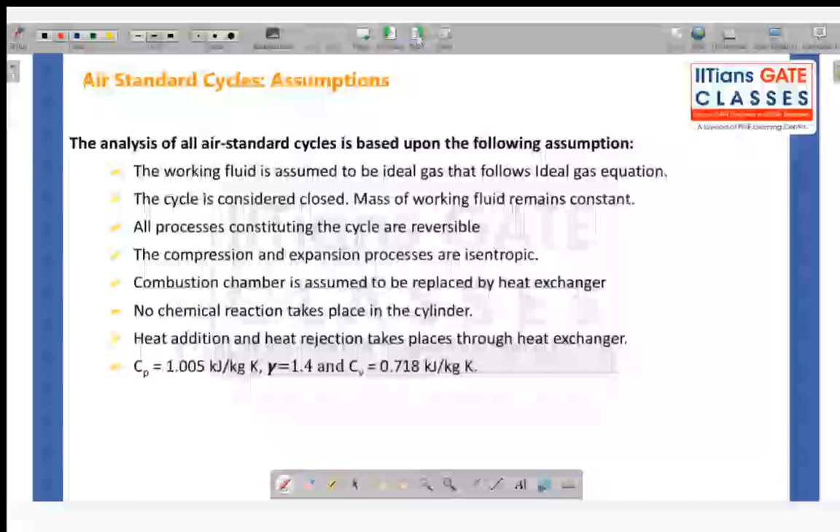So we will be covering Otto cycle, diesel cycle, and Joule cycle, which is also called gas cycles. And finally, we will cover compressible flows. Just a brief idea, because when you specially go to that particular topic, you will study each and everything in detail. So we will cover the very basic idea of compressible flows. Okay, so I hope we are ready to start without any delay.

So you see, basically, whatever cycle we use in power plants, or even in automobiles, in your petrol engine, diesel engines, these cycles are basically real cycles. Now in order to do a thermodynamic analysis on those cycles, you have to make some assumptions. Now when you apply those assumptions to the real cycle and derive a thermodynamic cycle, that is called an air standard cycle. Again, I will tell you something.

For example, you have this reciprocating engine, and there will be fluid going in and coming out, but this is your real engine. Here, maybe, for example, you will assume that you are adding heat at constant volume. You assume that the piston is constant and you are adding heat in a very small amount of time, but in reality this piston will be moving in the real cycle. But for thermodynamic analysis, you will assume that for that particular instant in which heat is added, this piston is stopped and the volume is fixed.

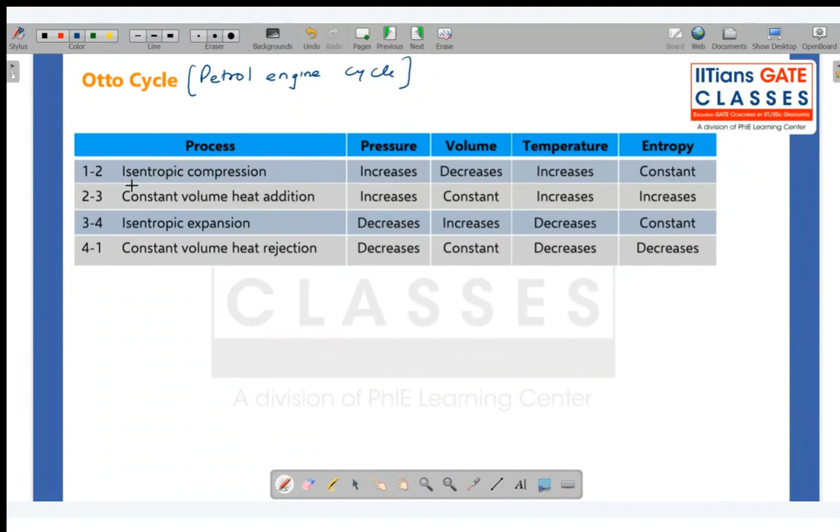Now we will directly move to Otto cycle. Otto cycle is basically your petrol engine cycle. Now in your petrol engine cycle, there are two types of processes. What are the two types? Two isentropic processes and two constant volume processes.

And if it is compression, then what will happen? Pressure is going to increase, volume is going to decrease. And if you are doing compression, pressure and temperature both are going to increase.

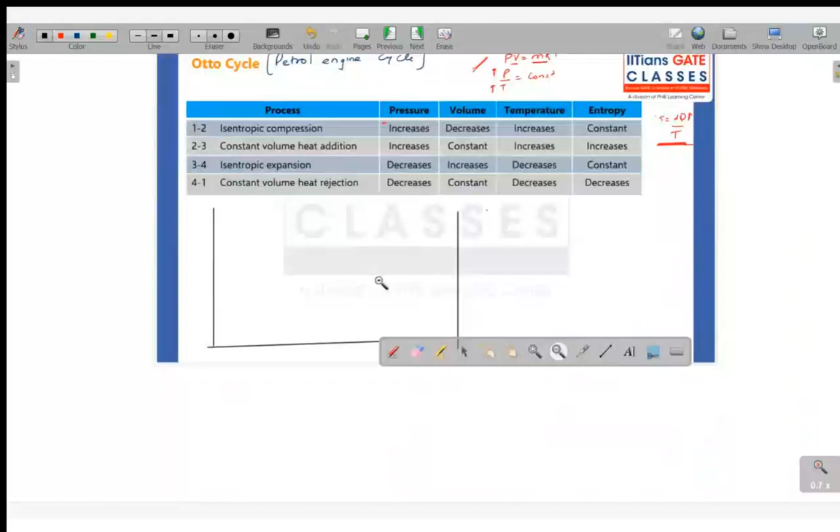So let us try to understand the PV and TS diagram. How to draw PV and TS diagram for the Otto cycle.

So let us say this is my pressure-volume diagram, and this is my temperature-entropy diagram. First, 1 to 2 is isentropic compression. I hope you're all aware of how to draw isentropic and all other processes on PV and TS diagrams, because we have already discussed and drawn all these diagrams.

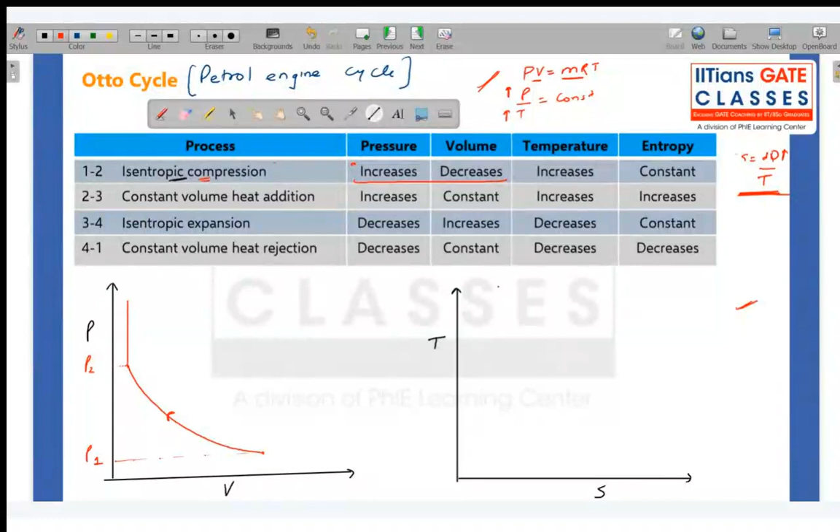Second, we are only talking about pressure and volume here; temperature and entropy we will see in the other diagram. Then constant volume heat addition. How do I draw constant volume heat addition on a PV diagram? By a vertical line up. Yes, vertical up. Very nice. So this is my vertical up, this is point 3, constant volume heat addition.

Then isentropic expansion. It will go in the opposite direction to that of compression, like this. And then eventually I will end my cycle with constant volume heat rejection, and you all know that it is vertically downward.

So this is 1 to 2, this is 2 to 3, 3 to 4, and 4 to 1. 1 to 2 is isentropic compression, so I have to give compression work. Then constant volume heat addition, so I am adding heat Q in. Then turbine work, work output going out, 3 to 4. And finally 4 to 1 is constant volume heat rejection, Q out. So this is my PV diagram.

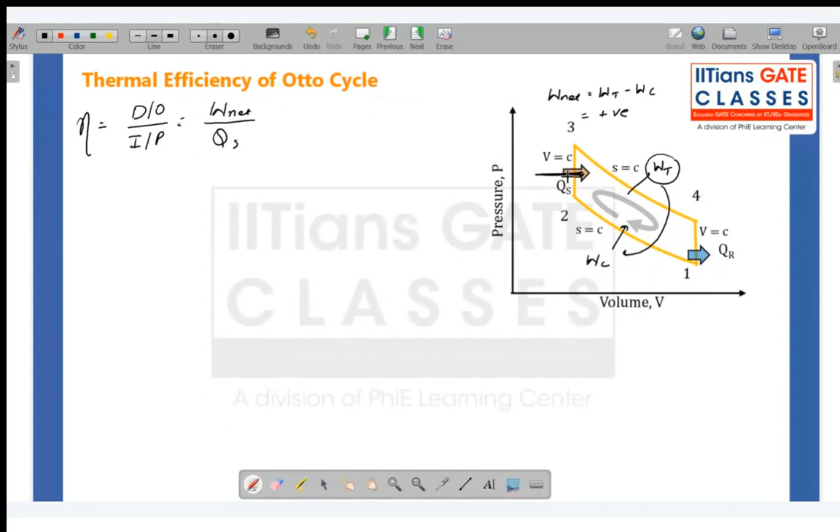Okay, what is net work? If this is your work of compression, this is your work of turbine, so net work is equals to work of turbine minus work of compression, and this should be positive. This should be positive because whatever you are getting from turbine, some part of it is given to the compressor, basically simple. Okay, so you want net work output, net work should be positive. And heat input, q supplied, this q supplied is heat input.

Okay, now we already know that from first law of thermodynamics, for a cycle, what is first law of thermodynamics for a cycle? Yes, so basically q net is equals to w net. Okay, so this area also gives you q net, also gives you w net. Yes, that is not for a cycle, that is basically in general first law of thermodynamics, that is a general form. Then we derive it for a cycle, then we derive it for the process.

Okay, so I can say it is q net upon qs. So I can also write q net as q supplied minus q rejected upon q supplied. So finally, I can write my efficiency as 1 minus q rejected upon q supplied.

Now, I have given you one table, a very good table, and I have shown you how to calculate heat rejection or heat transfer in constant volume process. So can you tell me quickly, constant volume process, how can I find out heat transfer? What is QR and what is QS? Constant volume heat transfer in constant volume process, how do you find out? Okay, if you don't remember, let me know if you now remember.

MCV, this is rejection, okay so this is rejection, 4 to 1, so I can write T4 minus T1. Okay, and supplied is MCV, T3 minus T2. Do you remember these formulas? We use CV here for constant volume, we use CP for constant pressure, CP for constant pressure, okay.

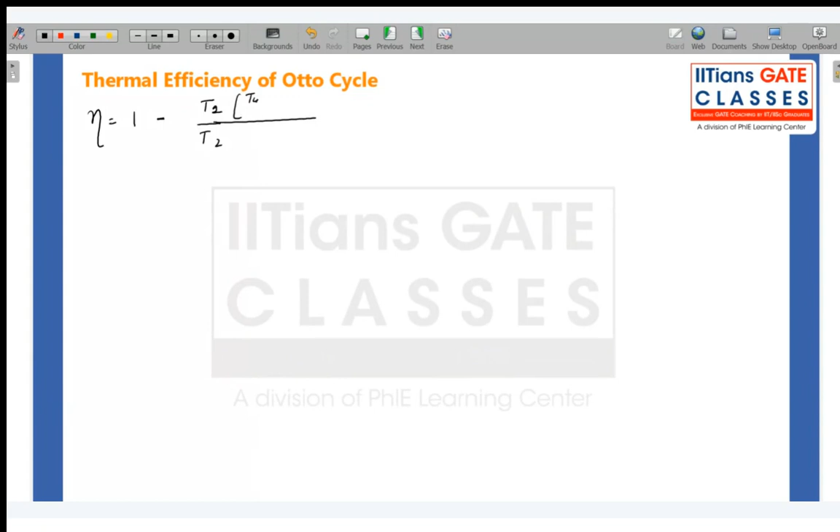So I can, because it is air, I know it is air, and the same fluid is flowing there, fluid is not going out, same fluid is flowing, so mass is constant, CV is also same. I can write 1 minus T4 minus T1 upon T3 minus T2. Now I can take out T1 and I can say T4 by T1 minus 1, and I can also take out T2 and I can say T3 by T2 minus 1. Okay, so right now this is my efficiency.

So what do I get? Efficiency is equals to 1 minus, I have taken out T1 and here I have T2, and what do I have in the numerator? T4 by T1 minus 1, and this is T3 by T2 minus 1. Okay, this much is okay? Yes, T3 by T2 minus 1. Yes.

Okay, now we will simplify it in the form that is mostly used. Okay, so you see here, let me take this diagram.

Okay, let's go to the next page. Now, what is the efficiency that I got? Efficiency equals 1 minus T1 by T2, and here we have T4 by T1 minus 1, and here we have T3 by T2 minus 1.

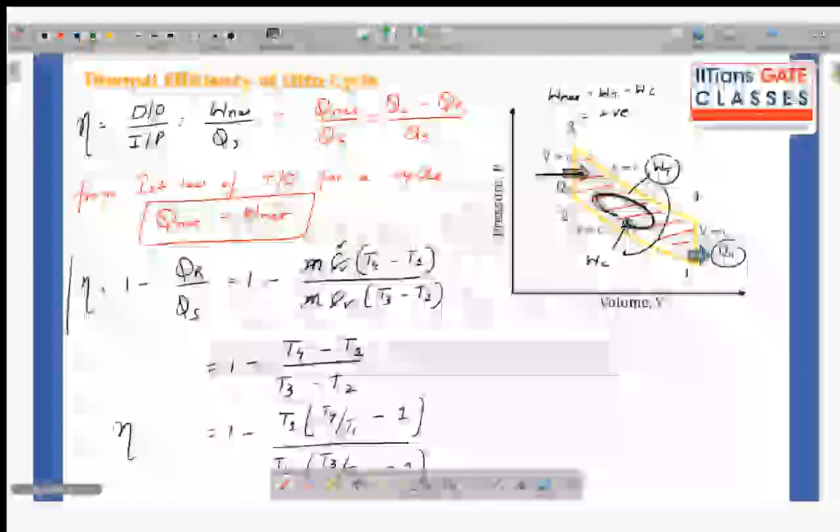Now can you also go back to this diagram? Can we say that V2 equals V3 and V4 equals V1? Yes, V2 equals V3 and V4 equals V1, right? You see, same volume.

So can I write V1 by V2 to the power gamma minus 1? Yes. So basically T2 by T1 equals V1 by V2 to the power gamma minus 1, and similarly T3 by T4 is also V1 by V2 to the power gamma minus 1.

So from these two equations, can I write T2 by T1 equals T3 by T4? Yes. Now let me modify it a little, and can I write T4 by T1 equals T3 by T2? I can write this, I've just taken it to the other side.

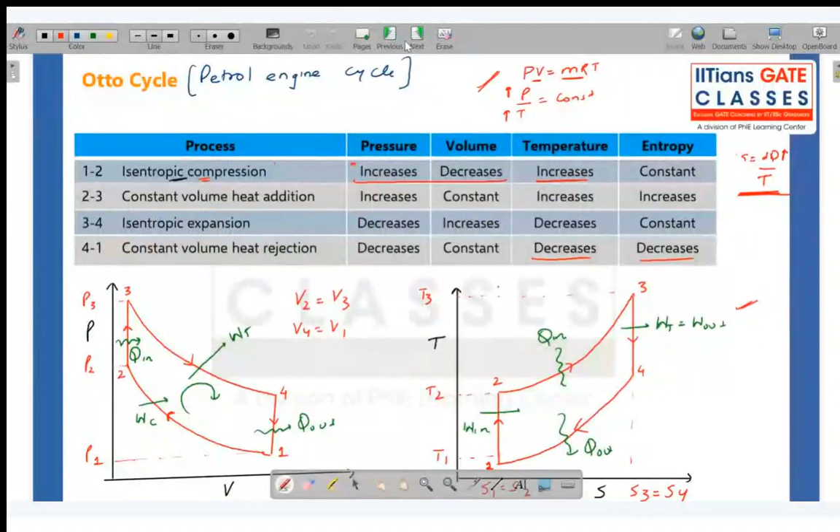Now let me subtract minus 1 here and minus 1 here. They're also equal, so I was trying to cancel this. I have gotten T1 by T2. So efficiency equals 1 minus T1 by T2.

Okay, now there are a few terms that you need to know.

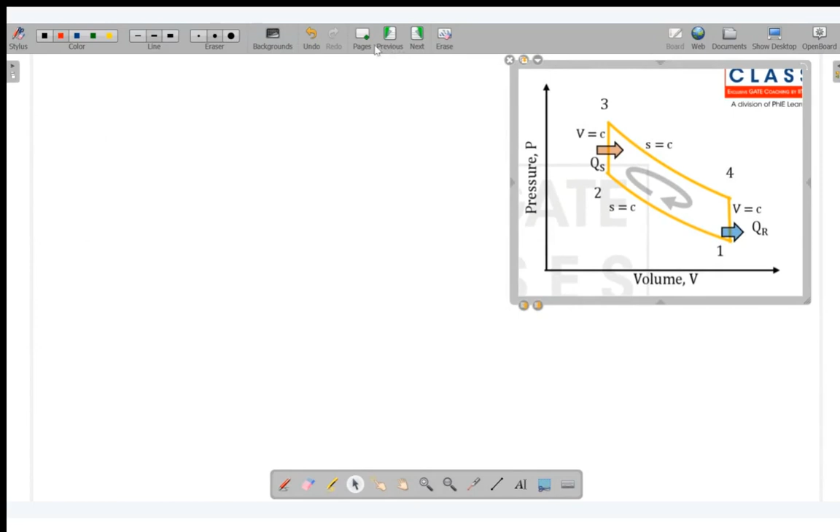Just one second. I did not want it to do this. Okay, anyway, now...

So basically, this is what you got. What does efficiency equal? Efficiency equals 1 minus T1 by T2.

I mean, the pages are a little bit shuffled, so this is how we started in the beginning, and there is this middle page here, and then this next one. So just be a little cautious when you study. Now, the efficiency we have gotten is 1 minus T1 by T2. Got it?

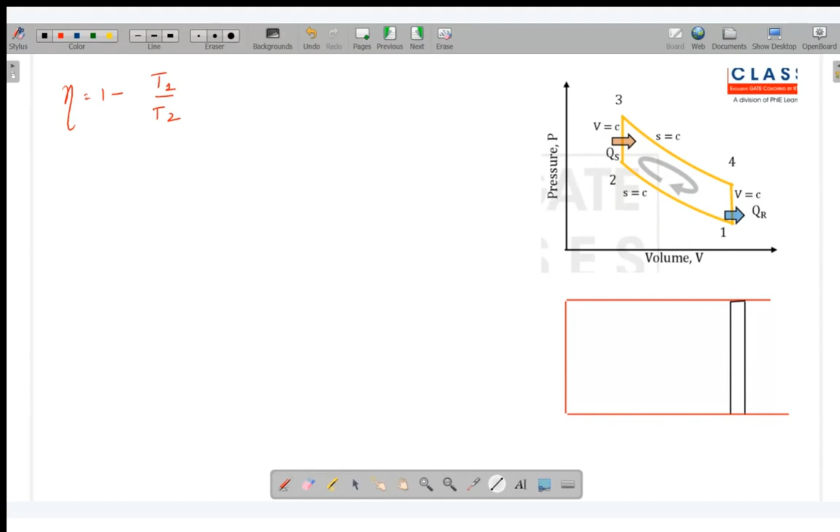Now this T1 by T2 is basically, you see, how your engine works, how your petrol or diesel engine is there. So it's something like this.

Okay, somehow it looks like this. Now, the piston only—this is the whole volume available, this is your V1, because piston is here and all the volume available is V1.

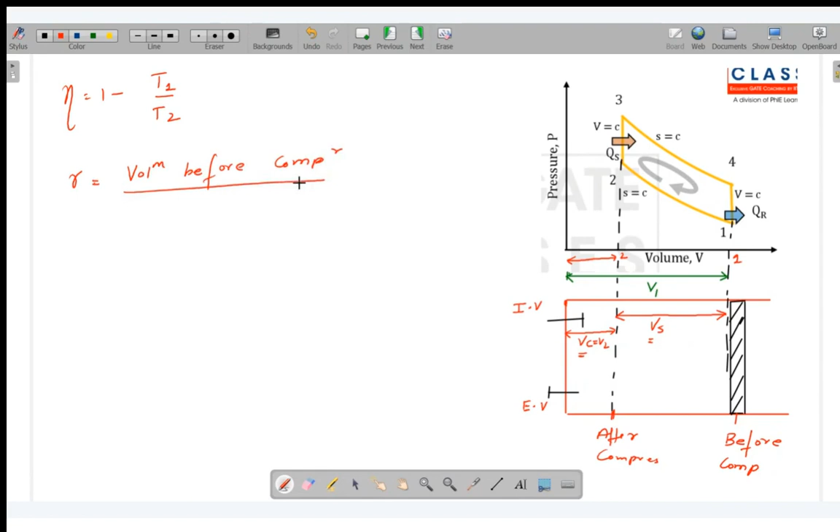Now this ratio is before the compression. This is before compression—piston is here before compression. Then when the compression ends, the piston is here after compression.

So the volume before compression and the volume after compression is called compression ratio. So this is V1 by V2. And that is also equal to T2 by T1 equals V1 by V2 to the power gamma minus 1, or compression ratio to the gamma minus 1.

So how can I write my efficiency formula? I can write efficiency equals 1 minus 1 by R to the gamma minus 1. This is how I can write my efficiency formula in terms of compression ratio. Why is compression ratio important? Because in questions they will give you compression ratio most of the time, otherwise you will need to find it out. So compression ratio is very important when we talk about Otto cycle or diesel cycle.

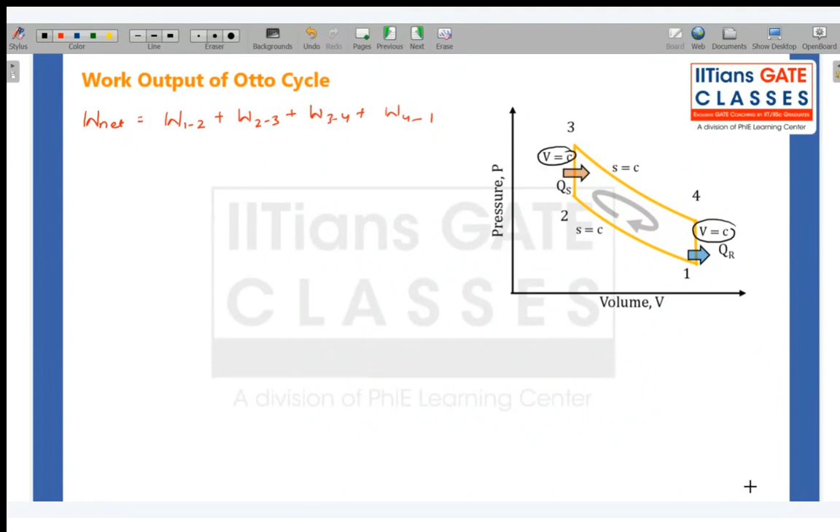This slide. Yeah, this is the start of the derivation, no? Okay, just one second, this is the start of the derivation. So let me write the numbers. This is your first slide, this is your second slide, then this is your third slide. Okay, and finally we have reached here.

Got it? So I will not waste much time because we all know constant volume work is how much? Constant volume work is how much? Yes, zero, so this is zero and this is zero. And this is isentropic, these two are isentropic processes.

So I hope you already know how to calculate isentropic work transfer. Work 1 to 2... let me write 3 to 4 first because it is work output, and since it is negative work, it is work output so it will be negative, I'll write it later. So P3V3 minus P4V4 by gamma minus 1. This is this. Now minus P2V2 minus P1V1 upon gamma minus 1.

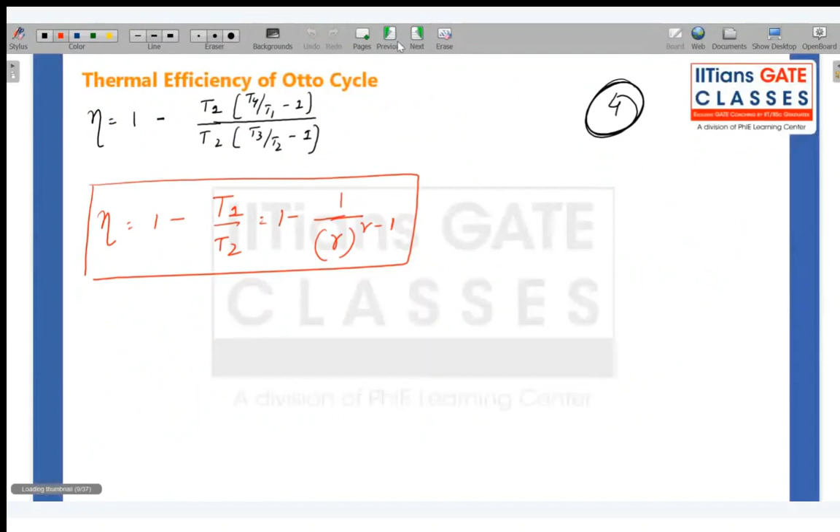What about process 3 to 4? P3 by P4 equals V4 by V3 to the gamma, which is also R to the gamma. So from A and B, I can say P3 by P2 equals P4 by P1, and this is also called pressure ratio, RP.

First derivation, which one? Did you take the screenshot? This is not it, this is the first slide, right?

Okay, so I can say this, and I can also say look, V1 by V2 equals R, so V1 equals R times V2. Also V4 by V3 equals R, so V4 equals R times V3. It's okay, Shivendra.

Now why am I doing this? I am just trying to simplify my equation, and this equation you will use very rarely. I am doing basic, simple mathematics. So even if you don't understand, it's fine because 99% of the time you will not need to use it, but because we need it later on, that's why I have to do it.

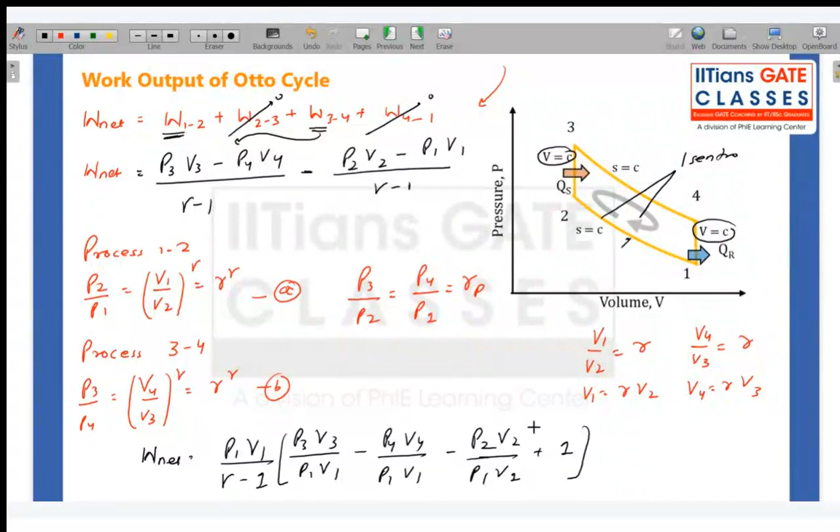Next, so I can take net work equals, let me take P1V1 upon gamma minus 1 out. I will divide everything by P1V1, okay, minus P4V4 upon P1V1, minus P2V2 upon P1V1, plus 1. Now you see, look, this is P1, okay, P3 by P1.

P2 by P1 is given, P4 by P1, P3 by P1. Okay, so now what do you have? You see, you have V1, you have V3. Okay, you have P4 by P1.

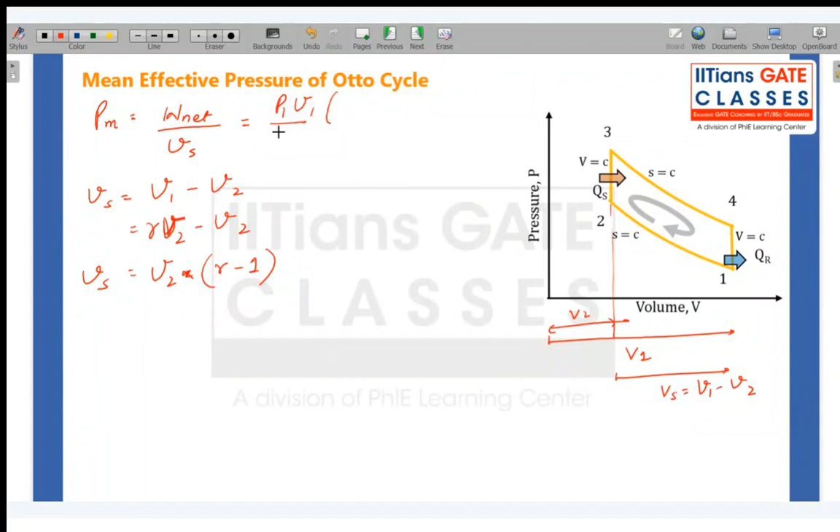Now from this equation, you see what is V2? V2 is equals to... V1 is equals to RV2. Okay, so I can write V1 minus R. Sorry, V1 is equals to RV2, right? V1 is equals to RV2. Okay, so I can write RV2 minus V2. Yes.

So V2 is equals to, sorry, into R minus 1. This is your swept volume. Okay, now I already got my equation earlier.

What was that? P1V1 upon gamma minus 1, RP minus 1, R gamma minus 1 by gamma. And what is swept volume? V2, R minus 1, R minus 1.

So if you write here, you see what is there? P1 is there, okay, and RP minus 1 is there, R gamma minus 1 is there. Let me take this gamma minus 1 here and R minus 1. Okay, now what is left? This V1 and this V2 is left. So V1 by V2, and that is equals to R. R is what? V1 by V2.

So this is your mean effective pressure. This is your mean effective pressure.

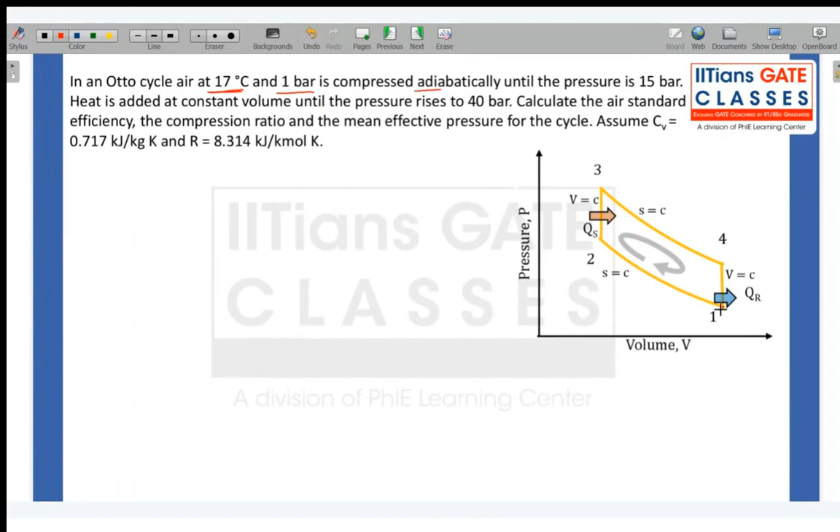Okay, so let us solve a quick question on Otto cycle. I should not start diesel cycle so soon, so we'll do one question. Maybe you will understand what type of questions. And again, look, it will be a big question. It is from a book, not from GATE or any exam, but it will cover more than one concept. So basically, whatever we have done, it will be clear to you. Okay, so just be patient with me.

Okay, chalo. In an Otto cycle, air at 17 degrees Celsius and 1 bar is compressed adiabatically. So in the compressor, it is entering. So what is compression starting? 1 point is starting. So T1 equals 17 degrees Celsius, or I can say 290 Kelvin. At what pressure? 1 bar, which means 10 to the power 2 kilopascal.

And it is compressed till the pressure becomes 15. So compressor outlet is P2, this is compressor inlet P1. Compressor outlet, that is P2, is 15 into 10 to the power 2 kilopascal. Heat is added at constant volume until the pressure rises, that means final pressure after heat addition, which is P3, is 40 into 10 to the power 2 kilopascal.

What do I need to find out? I need to find out Otto cycle efficiency, compression ratio, which is V1 by V2, and mean effective pressure, which is net work by swept volume. Okay, chalo.

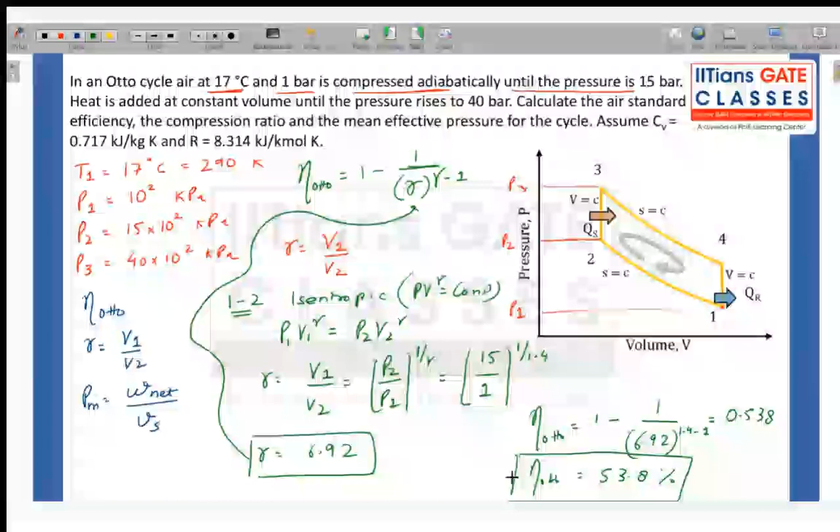Okay, now I know P2 is 15 into 10 to power 2, and this is 1 into 10 to power 2. 10 to power 2 will get cancelled, and this is 1.4. So R, when you calculate, you will get 6.92. Now I can substitute my R here, and I can find out efficiency 1 minus, 1.4 minus 1. Here this is around 0.538, so basically 53.8% efficiency you have gotten.

Okay, this much is fine. Yes, it's very simple, till now it's very simple. Okay, now next we have to find out mean effective pressure. We have to find out mean effective pressure.

So what is mean effective pressure for Otto cycle? Mean effective pressure equals net work by swept volume. So what is swept volume? Swept volume is V1 minus V2. How can I find out V1, V2?

You see, you know this at one point. First of all, I know it is air, so I can apply the ideal gas equation. So can I say P1 v equals RT? This is small v, okay. Small v equals capital V by mass. RT, so V1 I can say RT1 by P1. Can I say this? Yes or no?

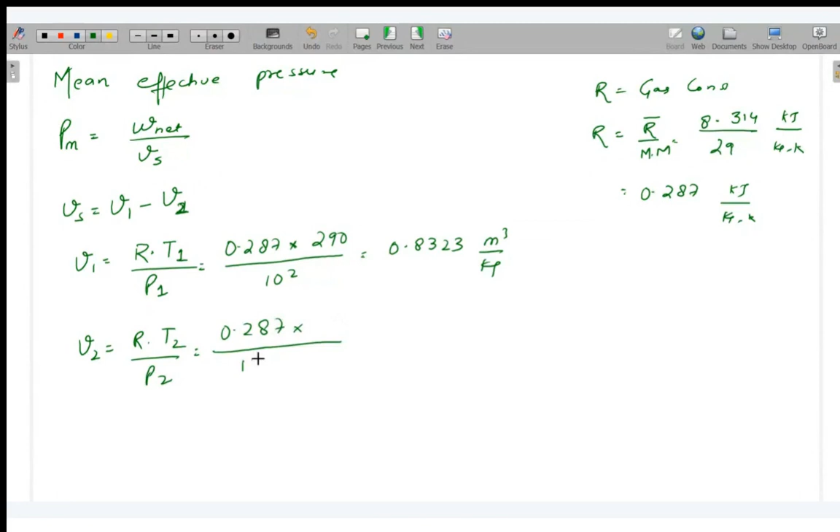Can I take this R? No, I cannot take this R. This is universal gas constant. I need to find out my specific gas constant, which is universal R divided by molecular weight. So 8.314 by 29 kilojoule per kg Kelvin, which I think gives 0.287 kilojoule per kg Kelvin. Okay, so R is 0.287. Temperature is given at the beginning and pressure is 10 to the power 2.

So this you will get, 0.8323 meter cube per kg. Similarly, I can find out specific volume at point 2 as well.

RT2 upon P2. Now the problem here is I do not know T2. Can you tell me how can I find out T2? Yes, by basically the ideal gas equation for isentropic process. You see, 1 to 2 is isentropic process, so I can write for this process, T2 by T1 equals P2 by P1 to the power gamma minus 1 by gamma. Yes, from volume also I can find out, but I do not know V2, right? First of all, I need to find out V2.

Or maybe compression ratio also I can find out. Yes, I know R. Okay, so from there I can find out. Yes, that is correct. Now I don't know individual volumes, but I know pressure ratio and compression ratio.

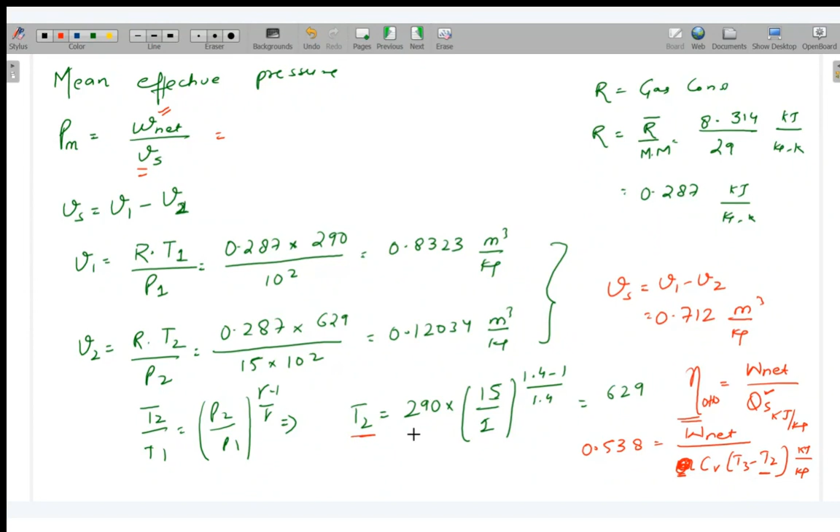So heat supplied, what is the heat supplied in this? Heat supplied at constant volume, I have already defined this for you earlier. It is mCV dt, and dt is what? T3 minus T2. Now this m, I can take as 1 because I can take the numerator as kilojoule per kg and denominator also kilojoule per kg.

So I can remove this, only CV. Now CV is given as this. I know T2 also, I have calculated T2 here. T3 I don't know. Now how do I calculate T3?

I can use my ideal gas equation. Anyone? What equation can I use to calculate T3? By process 2 to 3 which is constant volume. So I can say P3 by P2 is equals to T3 by T2. So basically T3 is equals to T2 into P3 by P2.

You see, I know T2, I know P3, P2. Very simple, when you put all the formulas and values, you will get T3. I know it got a little congested, but I just want to do it here. So this is your T3. Now I can write here.

Let me add another page. So my efficiency is equals to net work, small w, by CV into T3 minus T2. Efficiency is 0.538. Net work I need to calculate. CV is given as 0.717, and T3 I have just calculated, and this is 629.

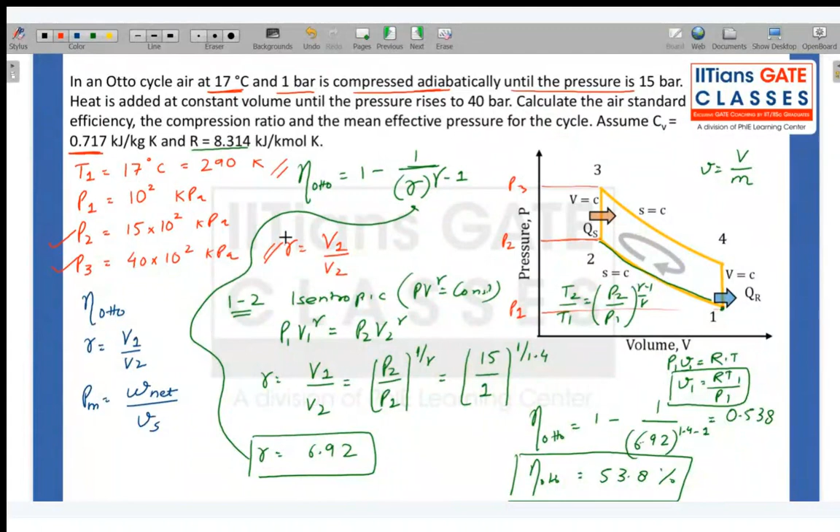So this is one question on Otto cycle. I tried to cover everything in one question. In GATE you will not get these big questions, it is from a book. In books you will find more than one concept covered. This is covering three concepts, actually more than three concepts. You have applied ideal gas equations.

You have applied this ideal gas equation, and for processes also you have applied isentropic process, constant volume process. You have used the efficiency formula, compression ratio you have defined. So more than 3-4 concepts we have covered. Got it? Yeah, it's basic physics, I think it's not even engineering level.

It's basically your universal gas constant value is 8.314 kilojoule per kilomole Kelvin. And when you use this in ideal gas, PV is equals to NRT. So this is number of moles, and this is universal gas constant.

Even I covered this when I talked briefly about ideal gas equations. Now this equation is not used by mechanical or aeronautical engineers, it is used for chemical engineers, because here we're talking about number of moles. Now in order to convert that into mass, the other equation we use is PV is equals to MRT. Here R is equals to R bar by molecular mass, and N is equals to M by molecular weight, same molecular mass or molecular weight. So basically we just turn it into that.

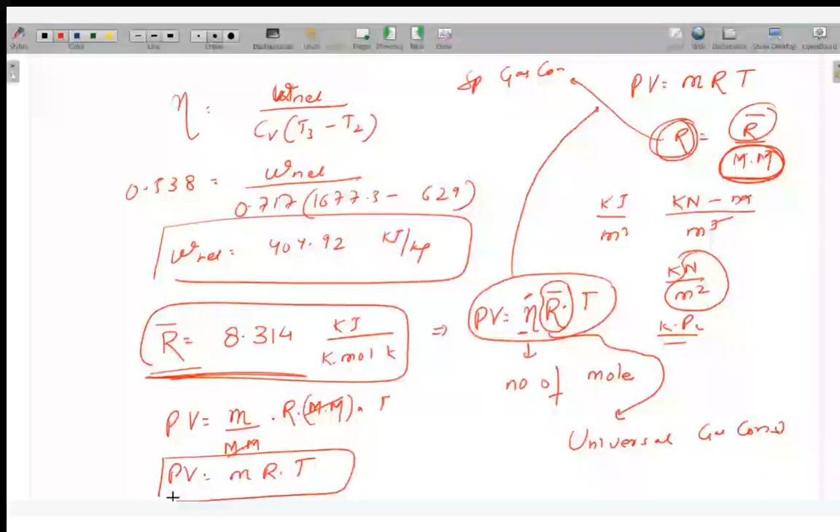So in this equation PV, you can write N as mass upon molecular mass. You can write this as specific gas constant into molecular mass and T. So molecular mass will get cancelled and you will get PV is equals to MRT. Got it?

Okay, now let's go to diesel cycle. Diesel cycle is same as Otto cycle, with a few differences. Here, 1 to 2 is isentropic compression, same as Otto cycle. 3 to 4 is isentropic expansion, same as Otto cycle. 4 to 1 is constant volume heat rejection, same as Otto cycle.

The only difference is you add heat at constant pressure, and therefore it is also called a constant pressure cycle, while Otto cycle is called a constant volume cycle. So I hope drawing the TS and PV diagram will be very easy for this, and explaining it will be much easier for me too.

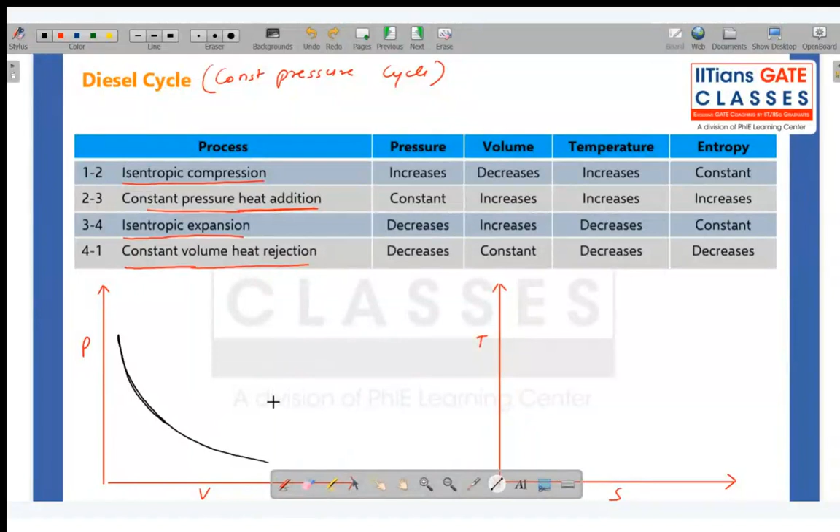Okay, so this is PV diagram, TS diagram. Same, last process will be constant volume heat rejection, right? Only difference is how you are adding heat. That's all. So let me draw the first process same as what we did there, and I'll draw this also.

So basically, this was your Otto cycle, 1, 2, 3, 4. This was your Otto cycle.

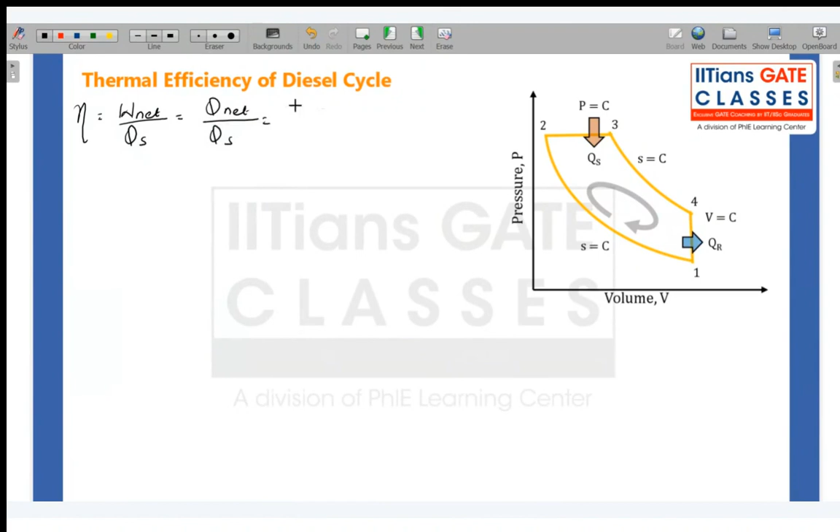Now, how do you calculate thermal efficiency? We will start from the basics. Thermal efficiency is equals to net work by Q supplied. I know that from first law of thermodynamics, Q net is equals to W net. So it's Q supplied minus Q rejected upon Q supplied, which is 1 minus Q rejected upon Q supplied. Now rejection is happening at constant volume.

So I can write M Cv (T4 minus T1). But heat supplied is happening at constant pressure, so what should I write? M Cp (T3 minus T2). Mass and mass will get cancelled, giving 1 minus 1 by gamma, where gamma is Cp by Cv, times (T4 minus T1) upon (T3 minus T2).

Now I need to further simplify it. What is the 1 to 2 process? 1 to 2 is isentropic, so I can write T2 by T1 is equals to (V1 by V2) to the power gamma minus 1, and this is also equal to R to the power gamma minus 1. So T2 is equals to T1 times R to the power gamma minus 1.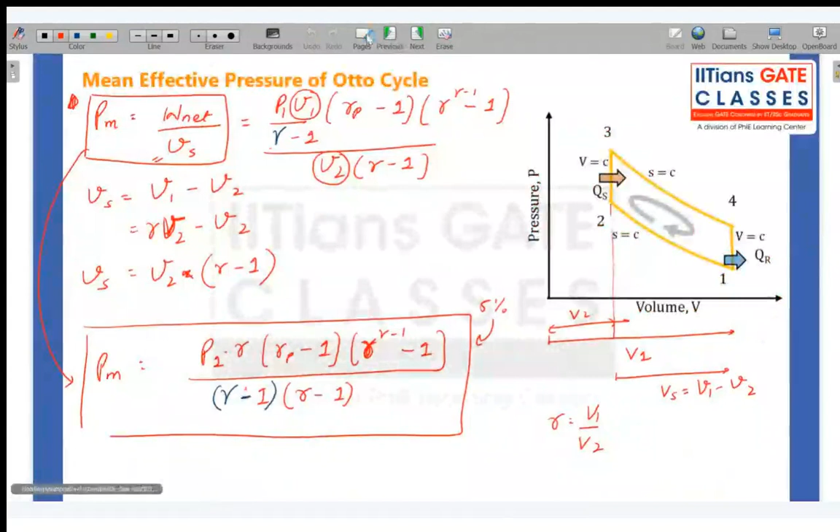Okay, now there is one thing before we move ahead that I need to tell you. Do you know the difference between petrol and diesel engines in general, in terms of fuel?

No, that is okay, that is okay. So usually what happens, let me go back and okay.

So in a petrol engine, before the engine we have a carburetor, where fuel and air is properly atomized and mixed. Ignition will be different, you ignite with diesel fuel differently. But in terms of fuel mixing, I wanted to tell you this.

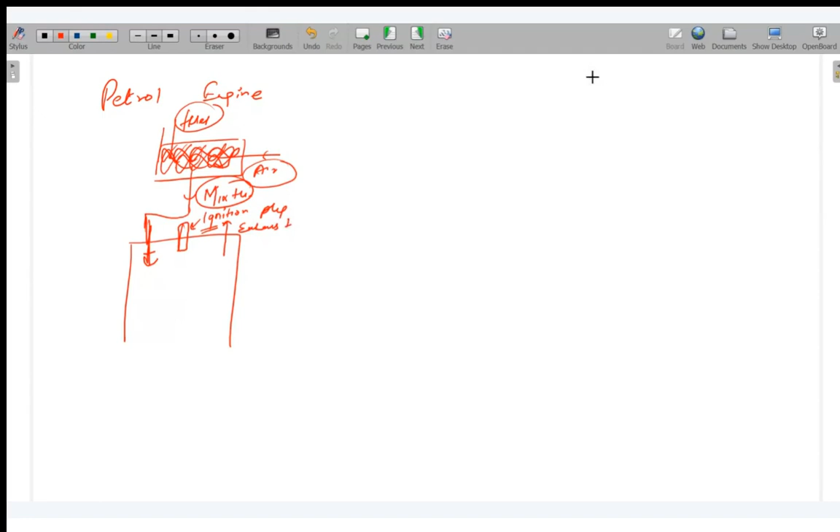So here fuel is coming, air is coming, and fuel and air is properly mixed, and here the mixture goes out. Mixture of fuel and air, and this mixture goes inside the engine. Here you have an ignition plug, a spark plug, which provides a spark to burn this mixture. Then when it goes out, it goes out as exhaust gases.

But in a diesel engine what happens is air directly comes in and air is compressed. So the piston is here, air is coming in, then air is compressed. So when the piston is here, the very compressed air is at very high temperature and pressure. Now we have a fuel injector here.

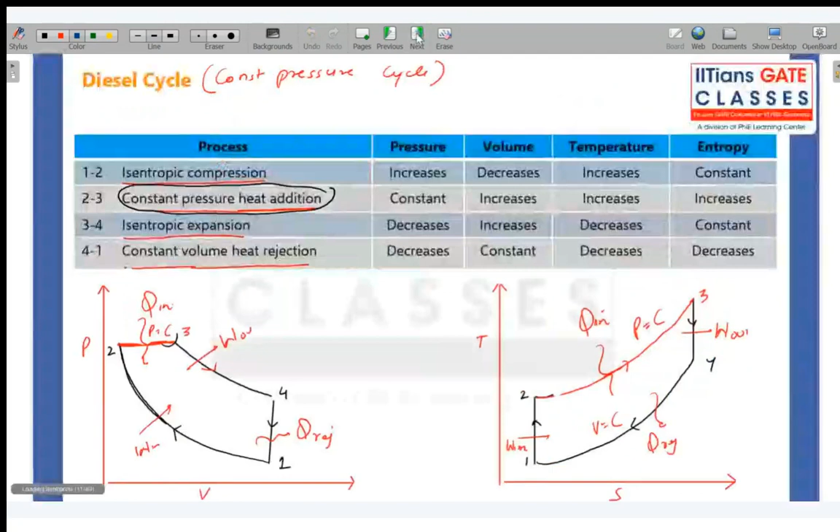So look, this 1 to 2 process is the compression process. Then 2 to 3 is what? At point 2, when the piston reaches here, you start fuel injection. At point 3, which is also here, you stop fuel injection. So basically you start fuel injection, you stop fuel injection, and that point is called the cut-off point. When you stop the fuel injection, it is called the cut-off point.

So 1 to 2 is air compression here, only air is compressed. Now at this point, fuel starts entering inside, and combustion is also started. You see, this air is at very high temperature and pressure.

As soon as fuel has entered inside, it starts burning. So if it starts burning, it starts pushing the piston down, and heat is added. Basically temperature and pressure will rise further, since you are adding heat due to combustion. Combustion is happening, fuel is also being injected, and then fuel stops injecting at point 3.

So this is called the cut-off point, point 3 is the cut-off point. Now, this V2 is equal to clearance volume, and this whole volume is V1, and this is called the swept volume, which is V1 minus V2.

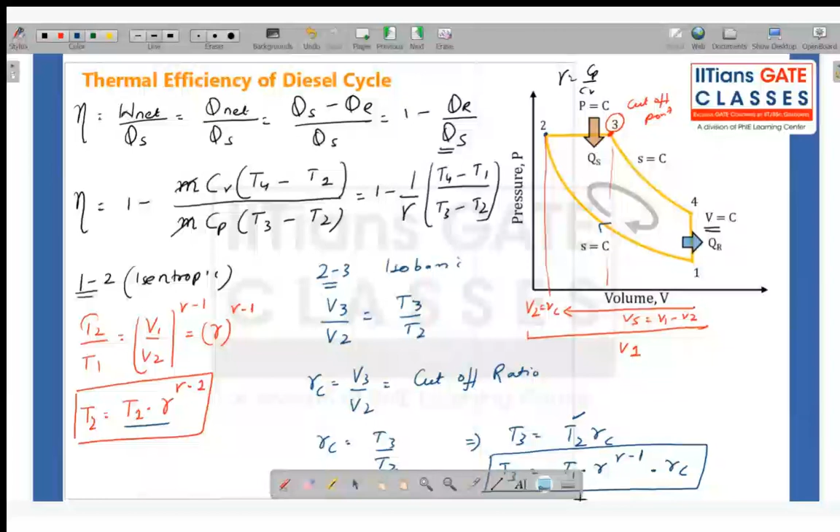And RC is equal to T3 by T2, so I can say T3 is equal to T2 times RC. Now what is T2? T2 is this. So T3 is equal to T1, R to the power gamma minus 1, into RC.

Okay, now we need... so you see what we have. We have found that T1 we have, T2 we have found out in terms of T1 and R to the power gamma minus 1. T3 also we have found out in terms of T1. Now what is left? T4 is left.

So I will go to process 3 to 4, which is again isentropic. So T4 by T3 is equal to V3 by V4 to the power gamma minus 1. I write this as V3 by V2 into V2 by V4.

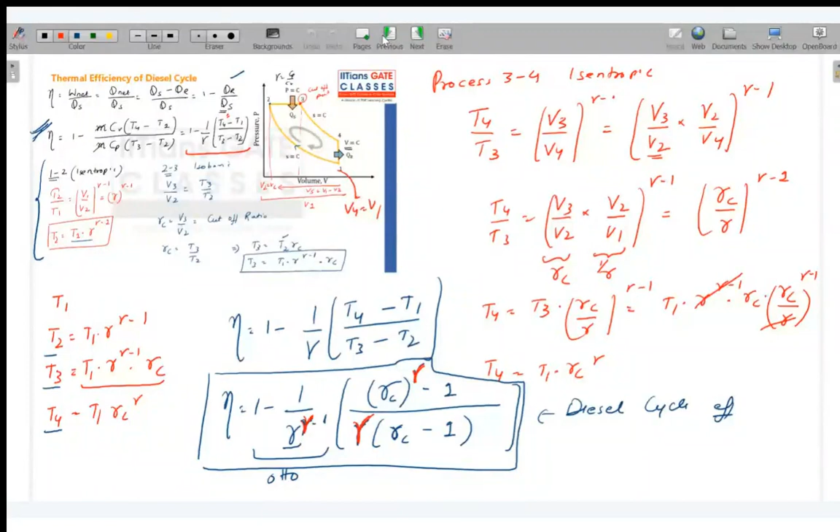Now we have to again do the tedious thing of work output. Again, I am not going to do this because very rarely are you going to use this. Work 1 to 2 plus work 2 to 3 plus work 3 to 4 plus work 4 to 1. Now look, 4 to 1 is 0, I know, and you also know.

Okay, I mean, I have, for now, marked it with a different color. I'll try to make it italic, but I really don't know how it will make a difference. Let's see.

So 4 to 1 is 0, we all know. Now what is 1 to 2? It is compression. So it is minus P2V2 minus P1V1 upon gamma minus 1. 2 to 3 is constant pressure, so P2 into

minus, V3 minus V2, final minus initial. Plus what about 3 to 4? 3 to 4 is P3V3 minus P4V4 upon gamma minus 1. Alpha to indicate R.

Look, I can use alpha, but basically even in books and all you will get R. So I'm really telling you it's not much. If you revise it one more time and write it yourself, try to be a little cautious. But really it is not too much. If you just revise it once or twice, you will know what is R, what is gamma. I know it can be a little difficult at this point, you will get confused, but once you solve two or three questions, it will be very easy, and you will be able to differentiate between where is gamma, where is R.

Anyway, okay, chalo. Now again I am not solving the same thing again. You have to do what we did there. So we have to calculate P3, everything we need to calculate in terms of RP, RC, and all that. I am giving you the last formula because derivation is really not important. I just wanted to do it there so that you will get some idea.

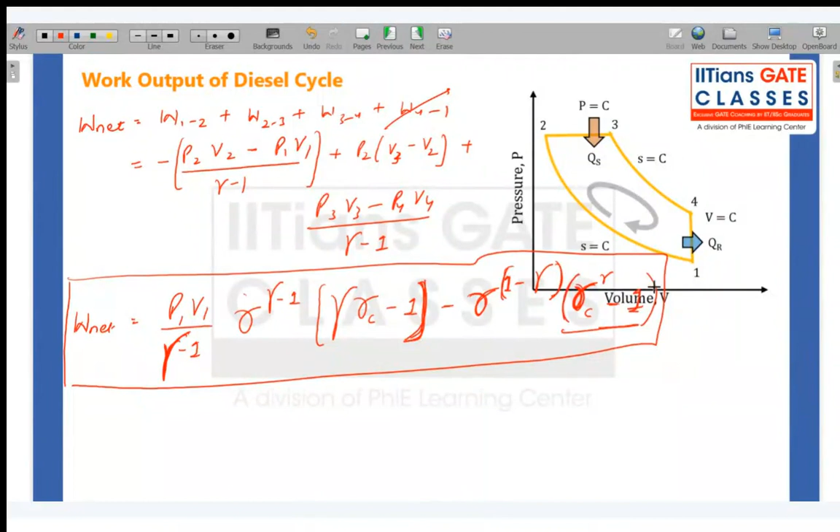RC minus 1, yes bracket is there. It is multiplied by RC. Gamma is multiplied by RC. No, I mean, it's because they are big brackets, so don't get confused. Okay, it's the same.

I drew a square because they were big brackets. It doesn't have any significance, circular or square, they're all the same. Now this we already know, like we have V1 here, and this is basically

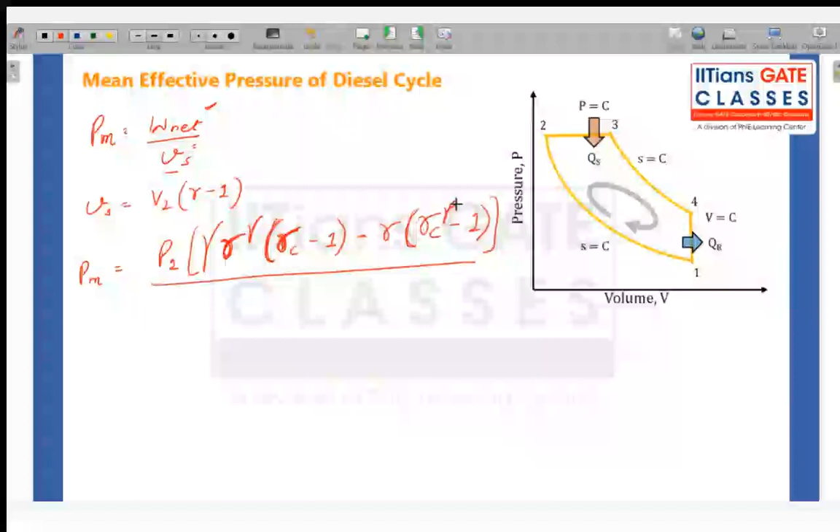V2, R minus 1. So same thing what we did there, we'll do here: P2 gamma, R, gamma. I really don't know what to do here, but this is how it is going to go: gamma, R, C minus 1, minus R, RC gamma minus 1, then bracket closed, upon this is gamma, okay? Gamma minus 1, R minus 1.

It's okay, don't worry about it much. If it would have been very important, I would not have left it like this. But because you keep asking about terms like effective pressure and all these terms, that's why I wanted to mention it before we go to any question.

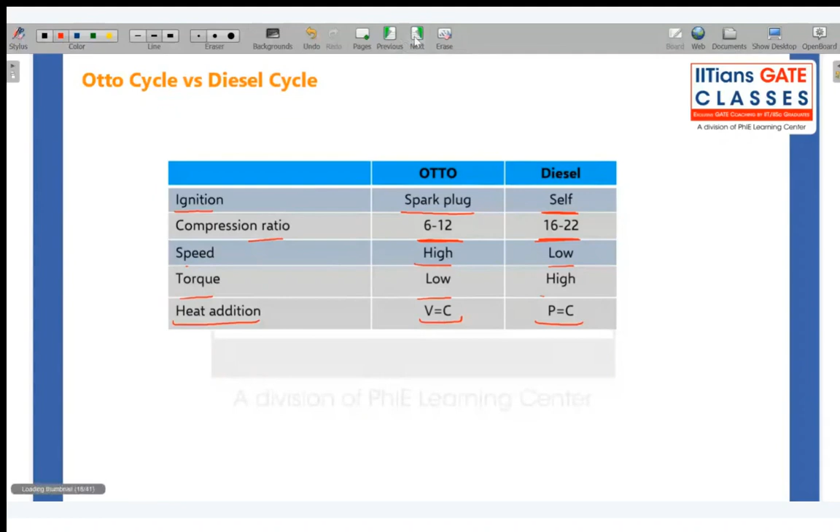Now, what is the difference? In Otto we use a spark plug. In diesel it is self ignition, because of high temperature and pressure. Compression ratio is very high in diesel compared to Otto cycle, so diesel we have 16 to 22. Speed is high in one, low in other. Torque is opposite, low and high. Heat addition process is different: here constant volume, here constant pressure. I hope this is okay for now.

Let us do one question on this diesel cycle. Determine the ideal efficiency of the diesel engine having a cylinder with bore, so look, diameter is 250 millimeter, bore means diameter. Stroke length is 375 millimeter. Clearance volume is 1500 cubic centimeter. And they are saying fuel cutoff occurs at 5% of the stroke.

So this cutoff point V3 is at 0.05 of the total stroke volume or swept volume. Assume gamma as given. I need to find efficiency. The simple formula for Otto cycle is 1 minus 1 upon R to the power gamma minus 1. For diesel cycle, you will add something more.

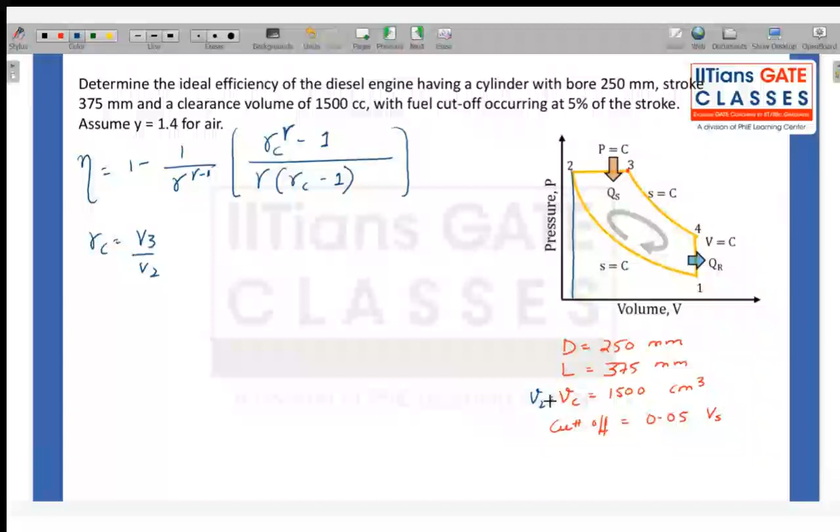So there's cutoff ratio, gamma minus 1, and gamma times RC minus 1. Now what is RC? RC equals V3 by V2, volume after cutoff divided by volume before cutoff. Now I know V2.

What is V2? V2 is this clearance volume, so V2 I know. But I don't know V3. How do I find V3? They have given cutoff volume. So cutoff volume is this part, which is V3 minus V2 equals 0.05 of swept volume. But swept volume is not known. How do I find swept volume if diameter and length are given?

Anyone, any idea? Swept volume - you see this cylinder, I need to find this. Yes, swept volume, I'm saying swept or stroke volume. So this is the volume that is swept. Since the piston is circular, it is pi by 4 d square into L. L is this length, the stroke length or swept length.

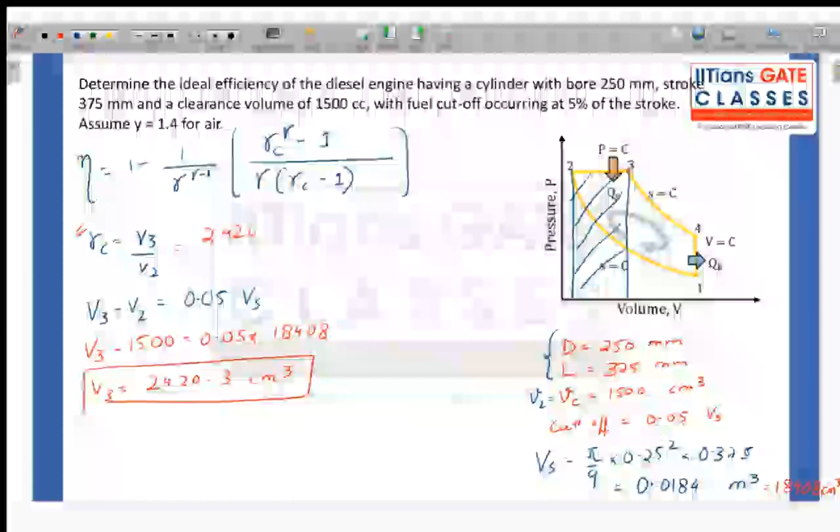So V3 minus V2, where V2 is 1500, equals 0.05 into 18408. So V3 you will get as 2420.3 centimeter cube. Now I can find RC: RC is 2420.3 by 1500, which equals 1.6135.

Now I know RC, I know gamma, but I don't know R. How can I find R? R is equal to V1 by V2. Now what is V1? Can I say it is swept volume plus clearance volume? Yes. And that is clearance volume, so it is 1 plus swept upon clearance.

Any doubt anyone in this variation? This is my swept volume, this is my clearance volume, and total is V1. Any doubt in this particular format? Now this is 18408 and this is 1500, so this gives 13.27.

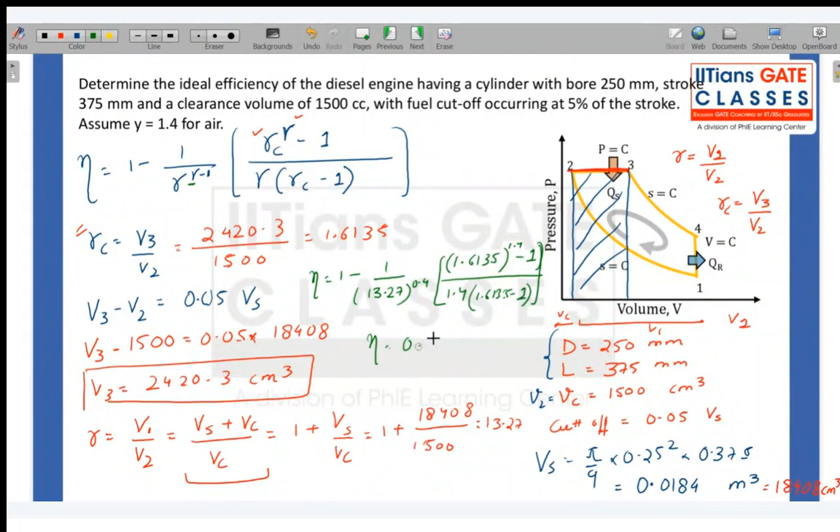Okay, so now I have everything, I can put it into my formula. Efficiency equals 1 minus 1 upon 13.27. Now gamma is 1.4 minus 1, it is 0.4.

RC is 1.6135. 1.4 minus 1 upon 1.4, 1.6135 minus 1. If you solve this, efficiency you will get 0.6052, which is 60.52%.

60.52%. Got it? Yes.

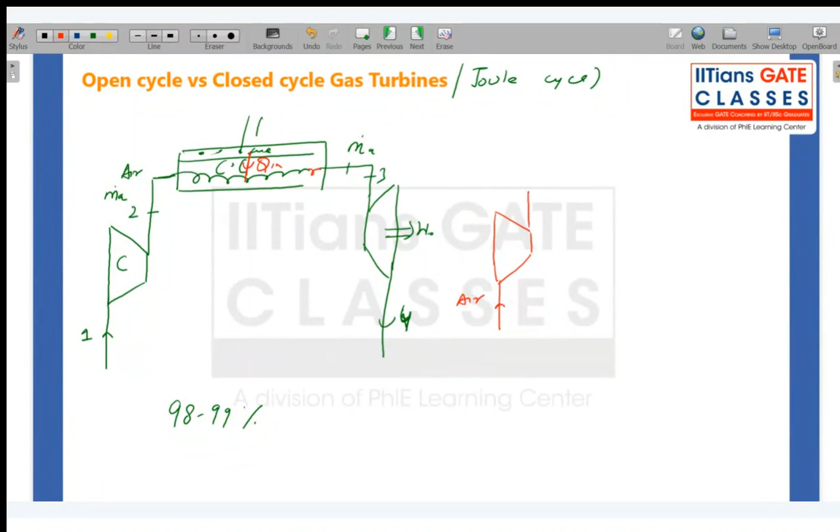And this is basically what we use 98 to 99% of the time in real scenarios. But we cannot do thermodynamic analysis in this cycle. We assume that cycle must be closed, no chemical reaction must happen. Now in the combustion chamber, chemical reaction is happening, so that is the reason we do not do any analysis on this. We assume a closed cycle.

How do we close it? Same thing, we use this compressor. Air comes in, air is compressed from 1 to 2, so you have to provide work. Now instead of combustion chamber, we assume we have a heat exchanger. Whatever combustion is happening here, we say combustion is happening somewhere else, only heat is supplied. So this is the heat exchanger in our air standard cycle.

And then this air comes to the turbine, and we assume this is joined together by a heat exchanger, because when it comes out, it will be at a higher temperature and pressure compared to surrounding, and this will enter at atmospheric temperature and pressure. So basically we assume we have a different heat exchanger which rejects heat Q out, so that it will enter again at atmospheric conditions. So this is an assumption we assumed, for analysis, we assume it is a closed cycle.

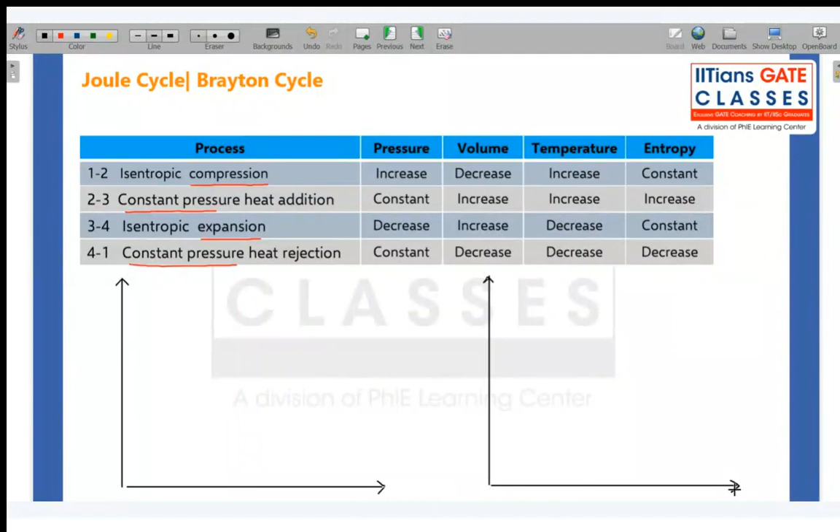Now Joule cycle again has 4 processes. What are they? 1 to 2 is isentropic compression, you're already aware of this, and 3 to 4 is expansion. Here heat addition and heat rejection are happening at constant pressure itself. I don't think it will be very difficult to draw the TS and PV diagram here.

TS and PV diagrams are very important, otherwise you will not get an idea of the question. Whenever you see a question, always try to draw at least one diagram, TS or PV. Mostly you draw TS diagram. But you need to know what the TS and PV diagram is, and you need to draw it, otherwise you will get confused with the points.

Now let's draw it. So 1 to 2 is isentropic compression, and I know that you know how to draw isentropic compression on PV diagram. Same thing, how we kept drawing it. So we'll start from here, we go like this.

Isentropic compression 1 to 2, then constant pressure heat addition, that also you know, it is a horizontal line. So this is, let us say till here, so this is point 3.

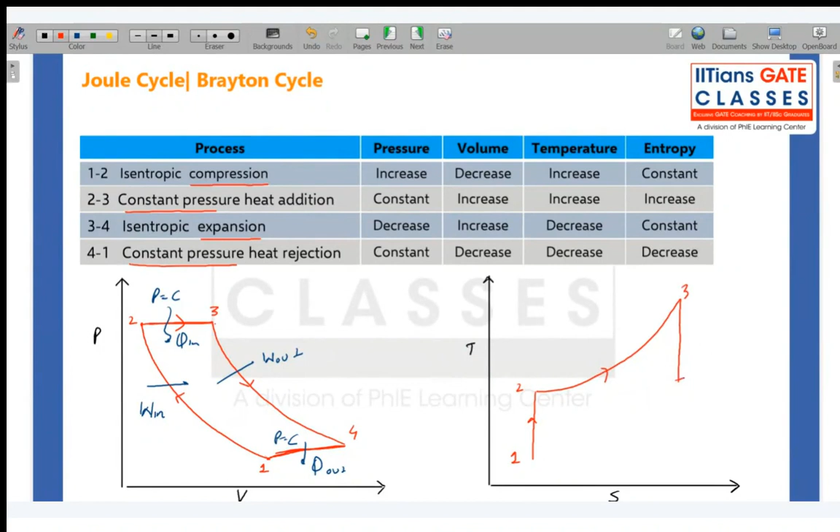So this is your work input, isentropic compression. This is constant pressure heat addition. This is work output isentropic. This is Q out, constant pressure.

Now you can do TS diagram also very easily. This is your 1 to 2 process, isentropic, vertical 1 to 2. Then constant pressure, something like this, isentropic 3 to 4, and again 4 to 1.

So here this is work input, this is constant pressure, Q in, work output, Q out, constant pressure. Pressure, remember, look, P2 is equals to P3 and P1 is equals to P4. This you need to remember. So these are TS and PV diagrams for your Brayton cycle.

Now how we can calculate the thermal efficiency? So thermal efficiency, we will use steady flow energy equation here. Steady flow energy equation. Now, do you have any doubt? Any confusion till now?

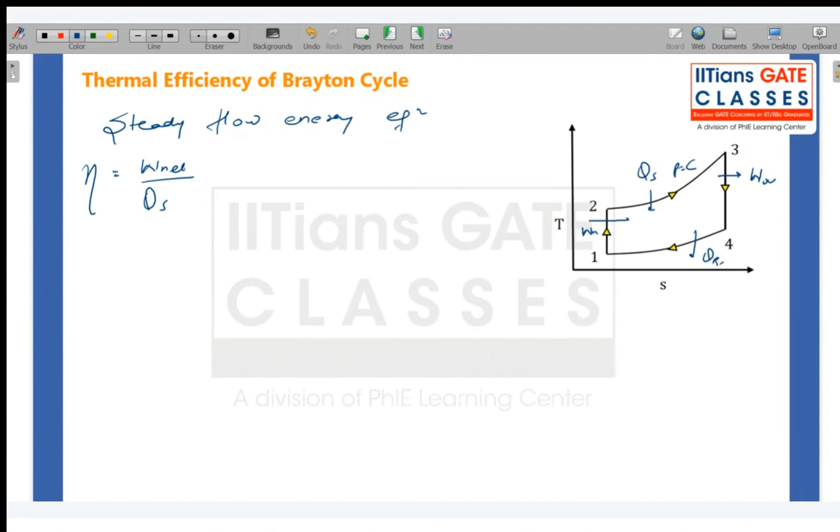So again, what is efficiency? Tell me, what is efficiency of any cycle? Basically, it is desired output upon heat supplied. So basically, this is your work input. This is Q supplied, constant pressure. This is work output. This is Q rejected, again constant pressure. Now, can I write it like this? Or should I tell you why I am writing like this? Is everyone okay with this statement?

Yes, for cycle. Now, if you remember, what happens in heat exchanger? We talked about the application of steady flow energy equation in a heat exchanger. So if you remember, we talked about heat exchanger, we assumed adiabatic. So our equation was H inlet plus Q in is equals to H exit plus work output. Now in heat exchanger it's adiabatic, so work output is zero. Q supplied is equals to M times HE minus HI. So I can say it is equals to M CP times T exit minus T inlet, right?

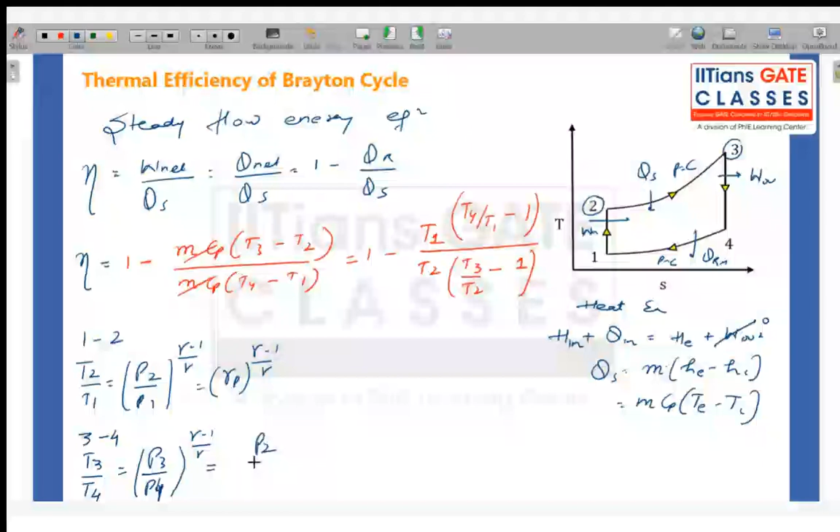So it is RP to the power gamma minus 1 by gamma. Now for 3 to 4: T3 by T4 equals P3 by P4 to the power gamma minus 1 by gamma. Now this is a constant pressure process, so P3 equals P2, and P4 equals P1. So this becomes RP to the power gamma minus 1 by gamma, or RP to the power 1 minus 1 by gamma.

So basically this tells me, by A and B, T2 by T1 equals T3 by T4. And I can also write T4 by T1 minus 1 equals T3 by T2 minus 1. So I can cancel this, and efficiency becomes 1 minus T1 by T2. I can also write T1 by T2 as 1 upon RP to the power gamma minus 1 by gamma. So it equals 1 minus 1 upon RP to the power gamma minus 1 by gamma.

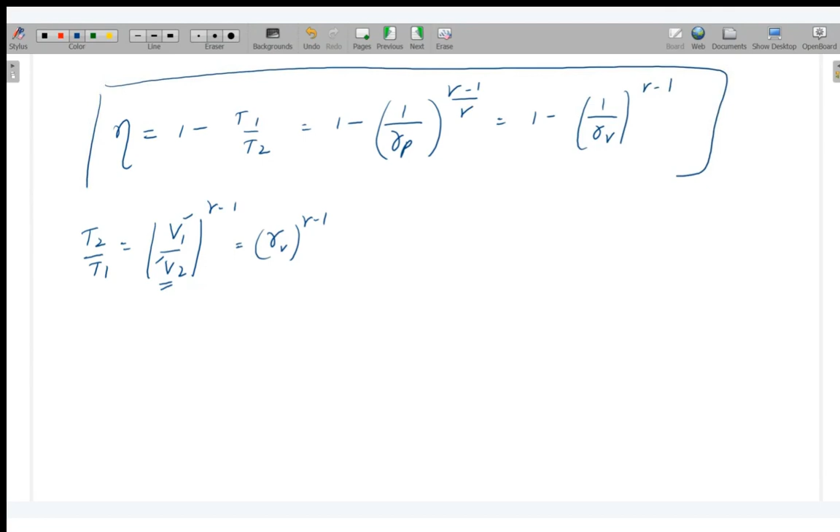One thing also I can do here is, process 1 to 2 is isentropic, so I can also write T2 by T1 equals V1 by V2 to the power gamma minus 1. This is my compression ratio RV - volume before compression, volume after compression. So I can also write this as 1 upon RV to the power gamma minus 1. So you can use any of the formulas based upon what is given to you in the question.

So here RP is the pressure ratio, which is pressure after compression by pressure before compression. And RV is the compression ratio, which is volume before compression by volume after compression.

Now there are a few terms you should know. First is back work ratio. Back work ratio is defined as work of compressor by work of turbine. And mostly it ranges between 40 to 60%.

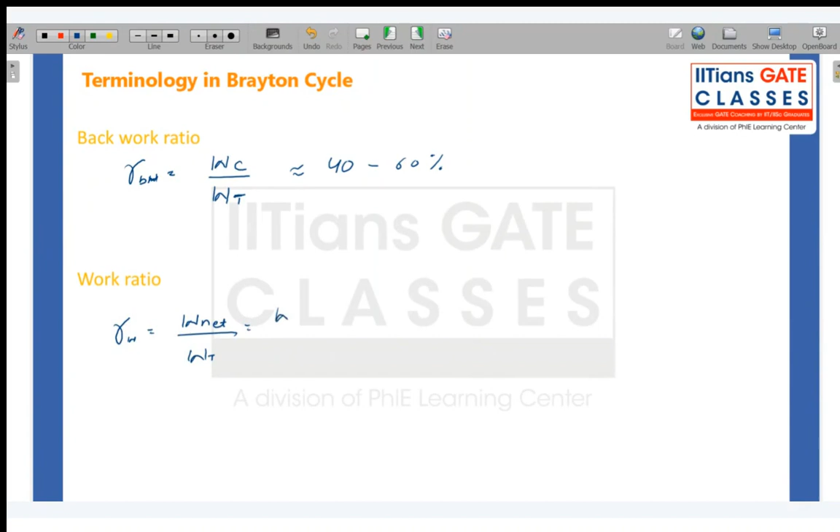This is back work ratio.

Now, if you know back work ratio, you can find out work ratio easily, which is net work upon turbine work. So this is basically turbine work minus compressor work, divided by turbine work. That also ranges in the same range, 40 to 60%.

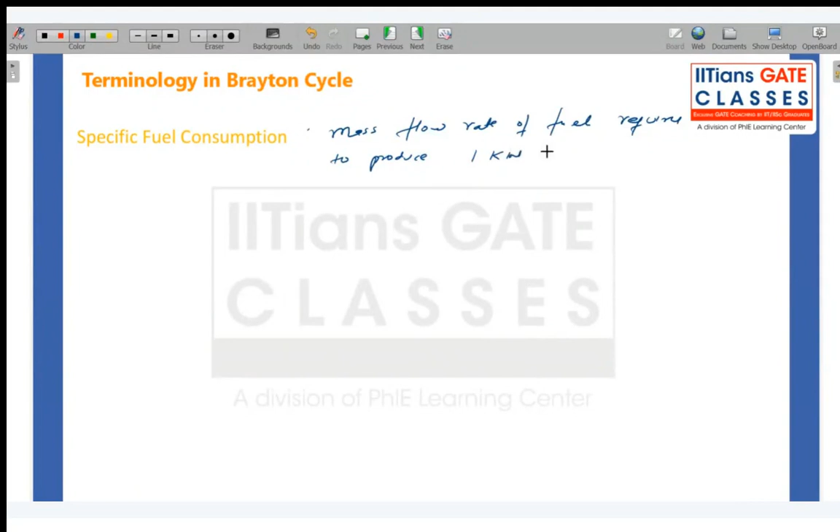Next is specific fuel consumption. So basically it is the mass flow rate of fuel required to produce 1 kilowatt of power output.

Now what is power? Power is work done per unit time, so mass flow rate of air into net work. Also there is a term called air fuel ratio, which is mass flow rate of air upon mass flow rate of fuel. So I can write mass flow rate of fuel by mass flow rate of air as 1 upon air fuel ratio into net work. This is in kg per kilojoule, or kg per kilowatt second.

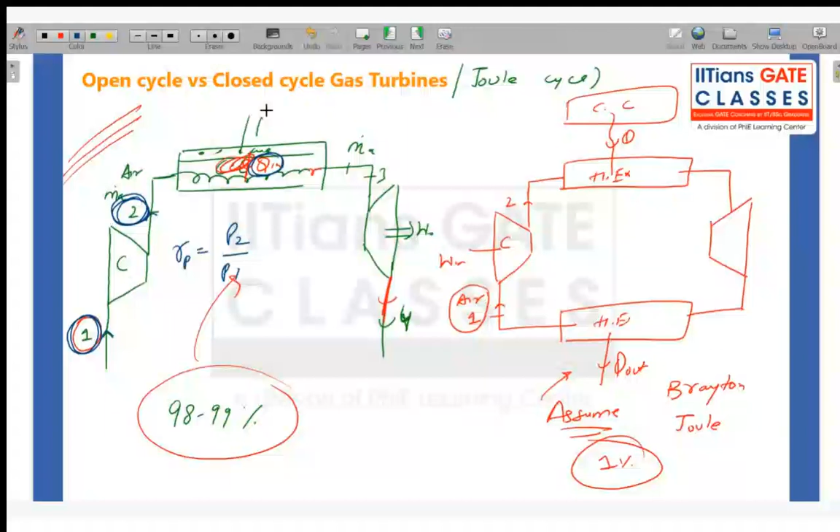In terms of hours also you can calculate specific fuel consumption: it is 3600 upon air fuel ratio into net work.

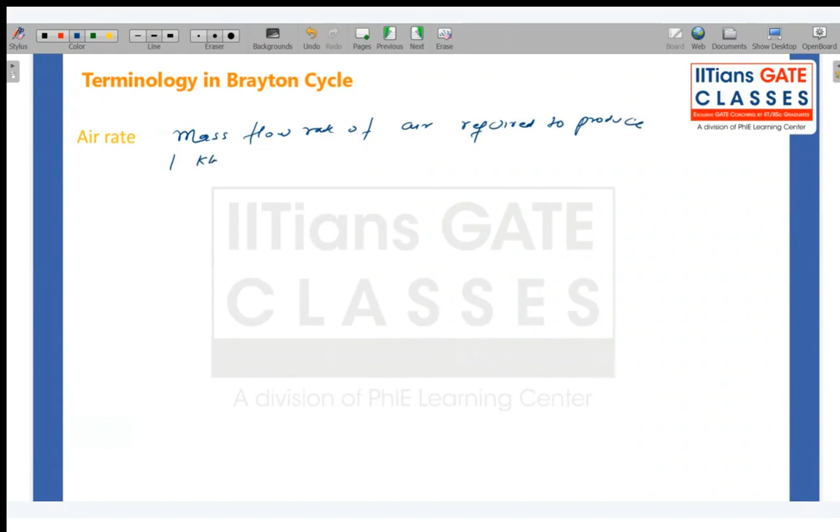So you have to know one thing - whenever we talk about heat transfer, we take mass of fuel into calorific value of fuel. But when you talk about work output or net work, then you talk about mass of air into net work, small net work, because this gives you work, but mass of fuel gives you heat.

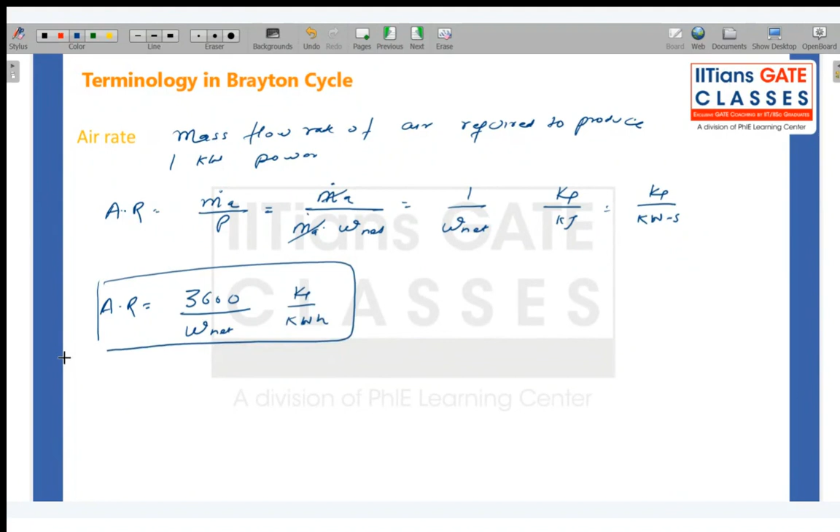And finally we have air rate. This is also mass flow rate of air required to produce 1 kilowatt power output. Same thing - air rate equals mass flow rate of air by power, which is mass flow rate of air into small work net, 1 upon. This is basically kg per kilojoule.

If you want to find out kg per kilowatt hour, then multiply by 3600 upon net work, giving kg per kilowatt hour. Okay, so very simple - let us try to solve one or two questions on this quickly.

Now, in a Brayton cycle, whatever we have drawn on the TS and PV diagram, it is a Brayton cycle. Air enters. At what point will air enter? At point 1. So at 1 bar, 27 degrees Celsius.

Okay, so basically, what do we have? We have P1 is equals to 1 bar and T1 is equals to 27 degrees Celsius, or should I say 300 Kelvin, and pressure ratio RP, RP is what? P2 by P1 is equals to 5.

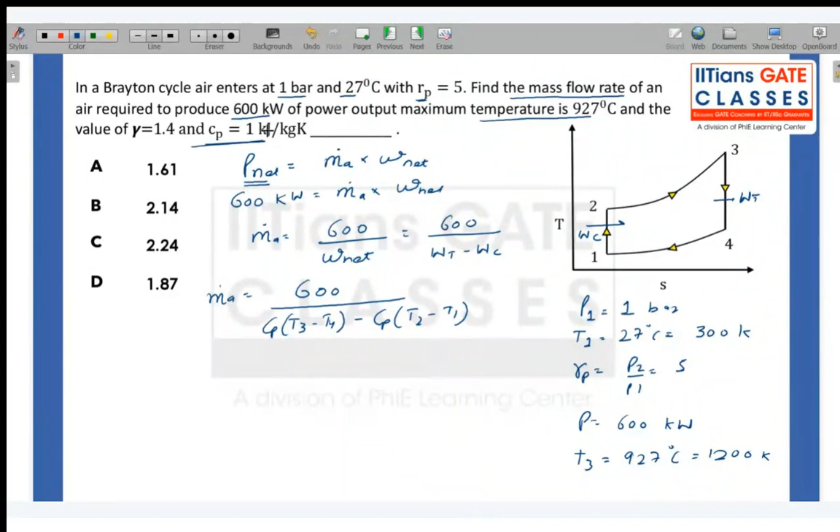Yes, so if you remember, we have also discussed our steady flow energy equation, that work of turbine is Cp dt. So T3 minus T4, minus Cp, T2 minus T1. This is compressor, this is turbine. Now look, Cp is same.

Cp is given as 1 kilojoule per kg, so I can write 600 by 1, T3 minus T4, minus T2 minus T1. Now, what do I know? I know T1, I know T3, but I do not know T2 and T4.

Can we find out T2 and T4? Yes, of course. What do we have? We can easily find out by using our isentropic equation. So for 1 to 2, T2 by T1 is equals to P2 by P1 to the power gamma minus 1 by gamma. So T2 is equals to 300 into 5 to the power 0.4 by 1.4. T2 is equals to 475.14 Kelvin.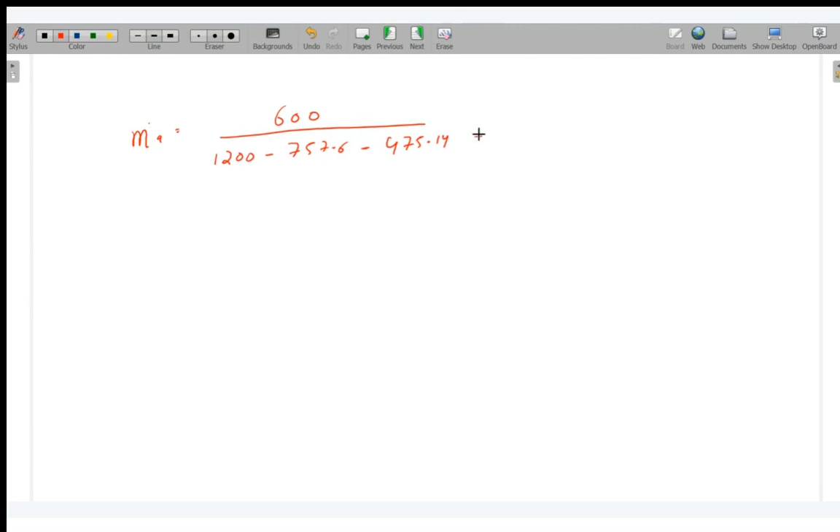Okay, so if you solve this, T4 you will get, T3 into 1 by 5 to the power 0.4 by 1.4, and T4 is 757.6 Kelvin. Okay, so now you can find out mass flow rate of air is equals to 600, this is already given to me.

Then it is 757.6, T4, okay, then T2 I have calculated, and then T1 is 300. So once you solve this, you get 2.245 kg per second. So this is how this type of questions could be asked.

Okay, let us see one more question here. An open cycle gas turbine uses a fuel of calorific value this. With air fuel ratio of 85, it develops a net power output of this. Determine the mass flow rate for 5 kilowatt hour of power output.

Okay, 5 kilowatt hour, determine mass flow rate. So it's also simple. What you can do is, calorific value is given, air fuel ratio is given. It develops a net power output of this. Determine mass flow rate of air required to produce it. Again, net power is equals to mass flow rate of air into net work.

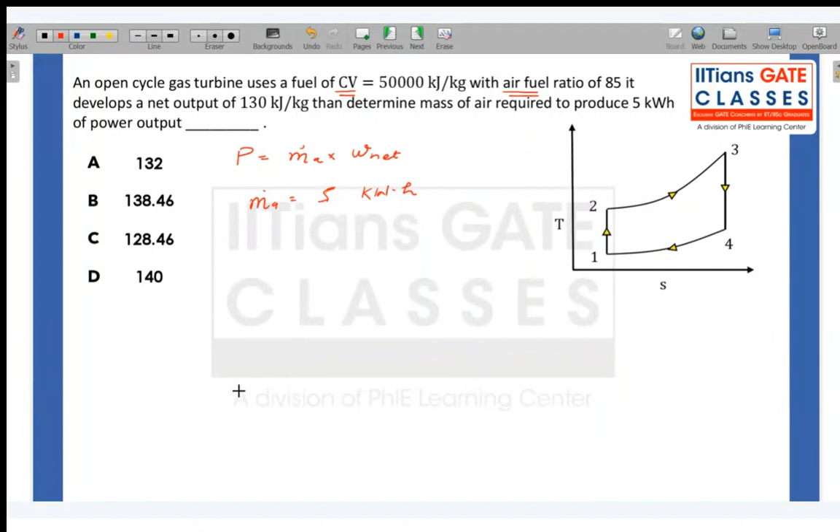Okay, so mass flow rate of air is equals to 5 kilowatt hour of power output. Do you remember we talked about air rate? So what was air rate? Air rate is equals to 3600 by net work, okay, so this is kg per kilowatt hour.

Okay, now we need 5 kilowatt hour, so 5 into 3600 by net work, kg per kilowatt hour. Okay, now this is given, this is given as work net is 130 kilojoule per kg. So 5 into 3600 upon 130. Can you calculate this? How much is this?

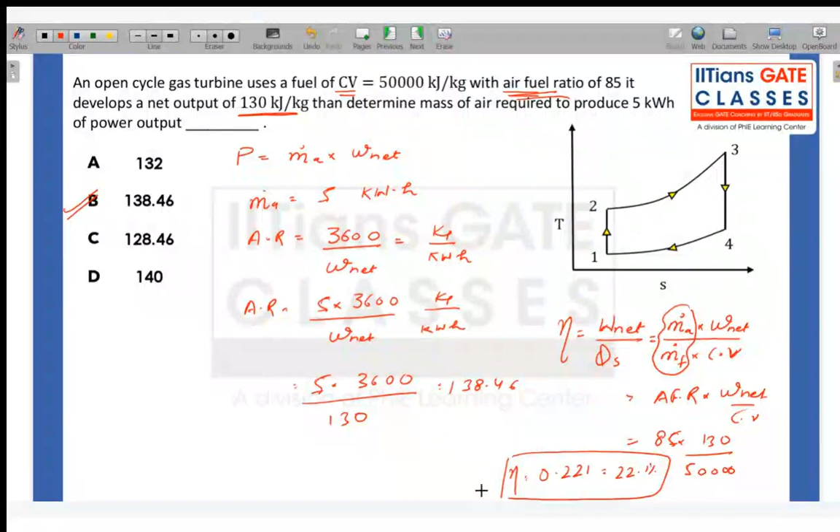So now what is this? Mass of air by mass of fuel - this is air fuel ratio, and net work by calorific value. So air fuel ratio is given as 85, net work is 130, and calorific value is 50,000. So basically it is 0.221, or 22.1% is your efficiency.

Of course, when you read it in detail, I think you would have specific subjects and topics as well. There you talk a lot about how to increase the efficiency, what is the effect of pressure or pressure ratio on the efficiency. All these things will be discussed in detail, but this is just a brief introduction.

Now, finally, let us go to compressible fluid flow. Maybe 15-20 minutes more, and we will finish this.

Now, what is fluid and what is compressible fluid? Fluid, I think you already know: when you apply an infinitely small shear stress, if the body goes into deformation, it is called fluid. If it is a solid and you apply a shear stress, it will not undergo any deformation. But if it is a fluid and you apply a shear stress, its shape will deform.

So now it has some angular displacement here. Its upper surface has moved a little further than its lower surface - lower surfaces are less deformed than the upper surface. So whenever you apply even an infinitely small shear force, you still get a deformation. That is called fluid.

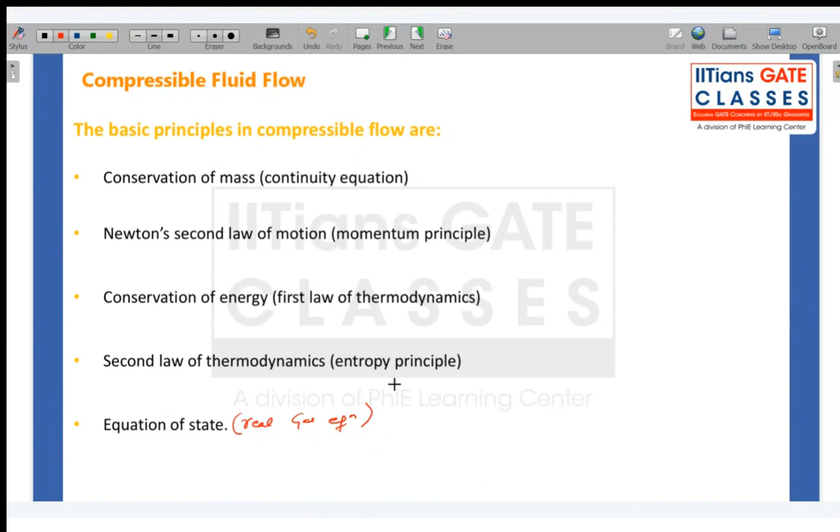So the basic principles that we use to define compressible flows are continuity equation, momentum equation, first law of thermodynamics which is conservation of energy, entropy principle, and equation of states. Equation of states basically includes the ideal gas equation and real gas equations - all these things come under equation of states.

Now how do we define the velocity of the pressure wave in a compressible fluid? Let us consider a one-dimensional flow through a long straight rigid pipe. This is our pipe, which we have filled with fluid that is compressible, and initially it is at rest.

Now, when you move this piston, it will cause a disturbance. What will happen is your molecules will feel a compression and expansion wave. Look, the fluid molecules that are here will push the molecules further - they will first collide with other molecules and then push them further. So all the molecules will feel basically a compression and expansion force.

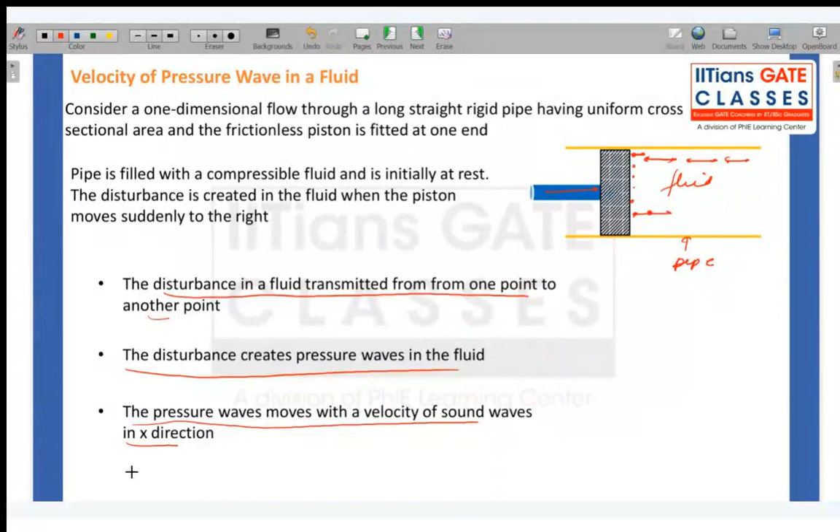It is called a disturbance, and the disturbance in the fluid is transmitted from one point to another. This molecule will first collide with another molecule, so compression forces will apply, then it will move further and expand. So a combination of compression and expansion, which is a pressure wave, is formed here.

So the disturbance creates a pressure wave in the fluid, and the pressure wave moves with the velocity of sound wave in the x direction. So we have to calculate at what velocity the pressure wave is moving.

Let us say V is the velocity of the piston, C is the velocity of the pressure wave, which will be different. P is the fluid pressure in the pipe before piston movement, the initial pressure, and P plus dP is after piston movement. When the piston has moved a distance x, the pressure is increased by dP, so the total pressure is P plus dP. Density rho is before the piston movement, rho plus d-rho is after the piston movement.

dt is the small time interval in which the piston moves the distance x, and x is the distance traveled by the piston, so distance equals speed into time. L is the total length, which is C into dt - the piston has moved only till here, but the pressure wave has moved from here till a wave point.

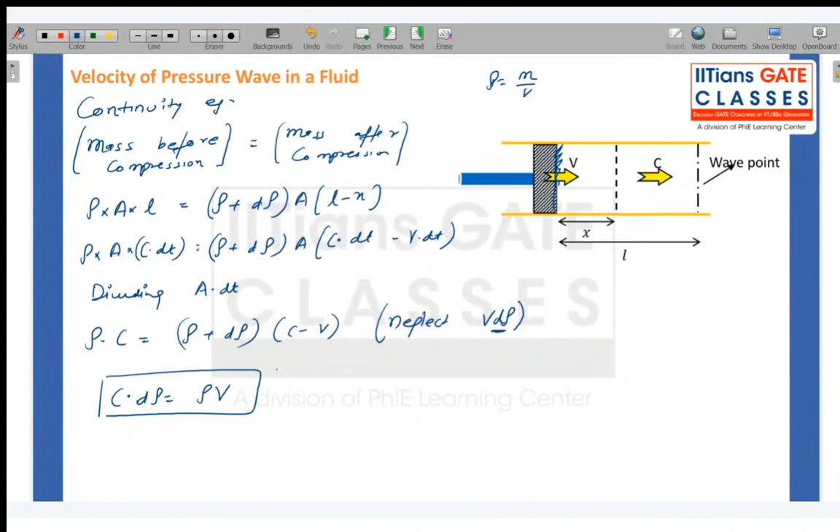So rho C will get cancelled both the sides. Rho C will get cancelled both the sides, and what you actually get is C d rho is equals to rho V. And we will neglect here V d rho. Neglect V into d rho because it is a small term, a very small term.

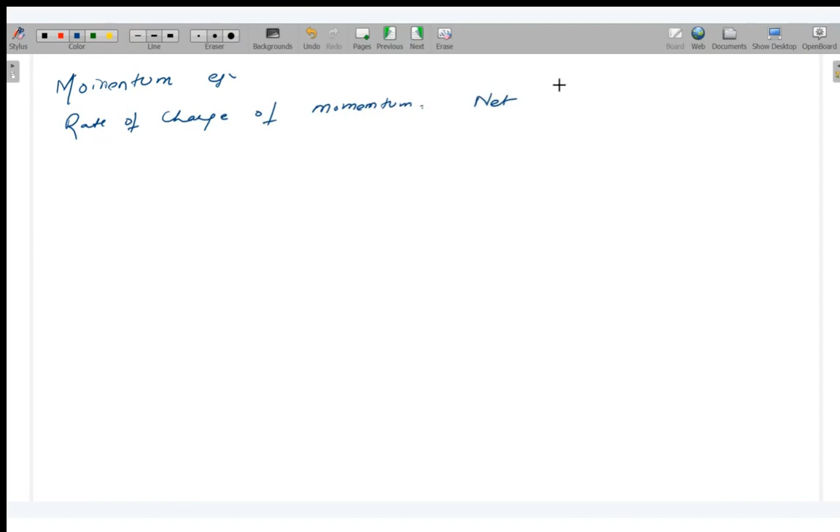Okay, next is this. So this is your continuity equation. Next is the second equation, the momentum equation. Momentum conservation. So rate of change of momentum is equals to net force. This is your Newton's momentum equation.

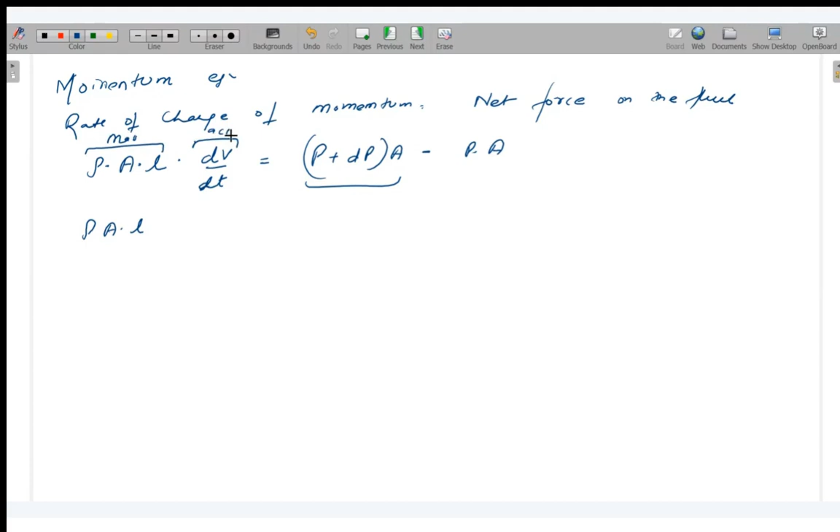Net force on the fluid. I know it could be a little boring, but I cannot do anything, these are very basic formulas. dV by dt, mass flow rate into dV by dt. And force is pressure force: P plus dP into area minus P into area. So this is final pressure, this is initial pressure.

So rho AL, this is mass into acceleration. This is mass, this is acceleration, so that is momentum. V minus 0, initial velocity, final minus initial velocity, equals dp into area.

Write rho A V C dt by dt is equals to dp into A, because here L is equals to C into dt. So dt and dt will get cancelled, and rho v is equals to dp by C.

Now if we combine equation A and B, so what is A? Combining A and B: it is C d rho is equals to rho v, and this is rho v is equals to dp by C. So if you equate both, this and this is same, so C d rho is equals to dp by C. C square is equals to dp by d rho.

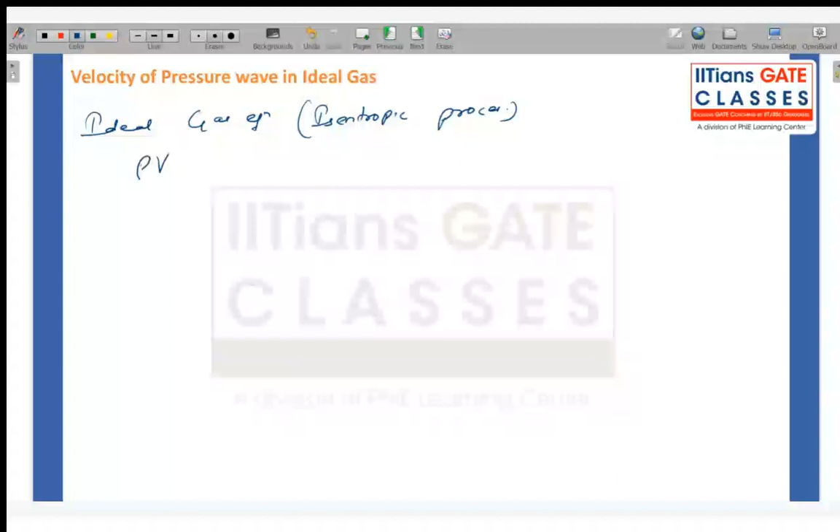So it is basically giving you the change in pressure with respect to change in density. C is equals to square root of dp by d rho. So this is basically the velocity of pressure or sound wave, whatever you want to call it, but it is in a fluid.

Okay, what about in ideal gases? So this is in fluid, what about in gases? In gases, so what do we have? We have the ideal gas equation for an isentropic process: PV gamma is equals to constant. So this is small v, and I can write density.

I hope that you know that specific volume is basically equal to 1 upon density, or do I need to define it? Are you okay with this, or do I need to define it? Now let me take log. So I can say, taking log and then differentiating, dp by p minus gamma d rho by rho is equals to 0.

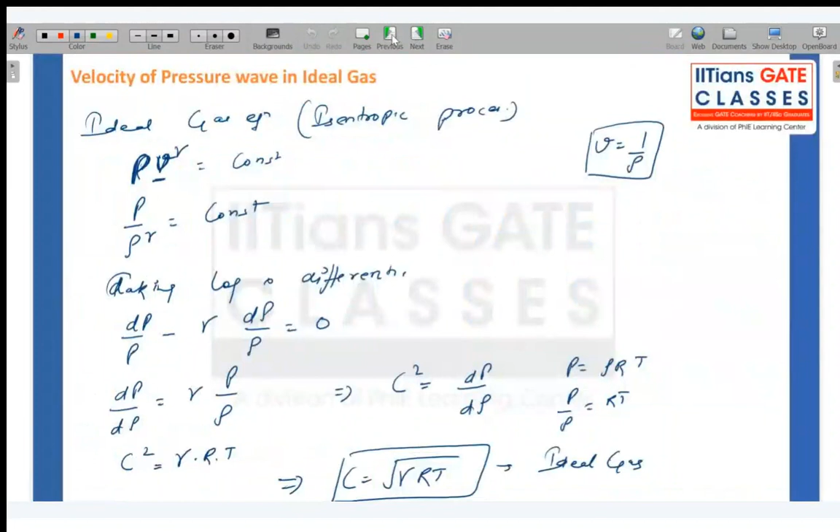dp by d rho is equals to gamma p by rho, and earlier also we have defined c square is equals to dp by d rho, where pressure is equals to rho RT. So I can write c square is equals to gamma RT, by p upon rho is equals to RT. So here I got C is equals to square root of gamma RT.

This is in ideal gas, this is the velocity of sound in ideal gas. Okay, so yeah, I think this is all. Basically, there is one more term which is called Mach number, I think I forgot it. Mach number defines the ratio of actual velocity to sonic velocity, actual velocity to sound velocity.

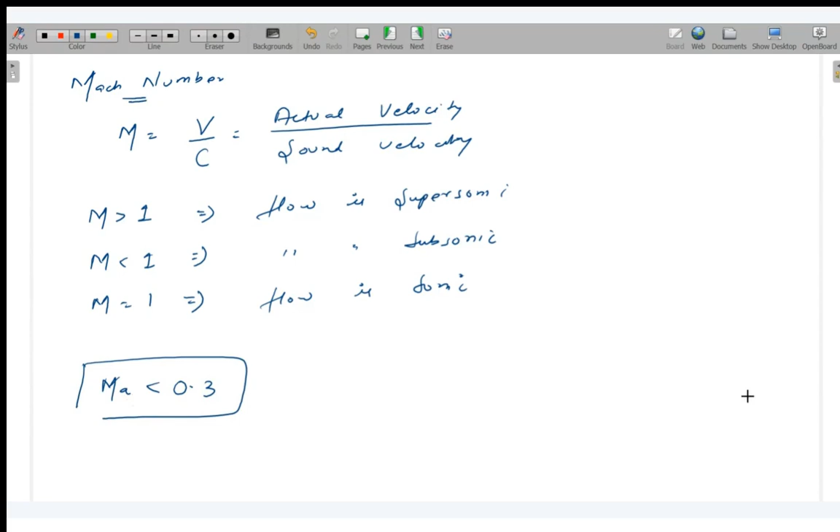If Mach number is greater than 1, then the flow is supersonic. If Mach number is less than 1, then the flow is subsonic. And if it equals 1, then the flow is sonic. Also, if Mach number is less than 0.3, then the flow is considered incompressible. If it is greater, then it is compressible.

I know we have covered a lot in this session. Whatever topics we have covered today, it is a brief introduction of each topic. Otto cycle I don't think you will need, but it's in your syllabus, because in aerospace I really don't think you will study Otto cycle or diesel cycle. But gas cycle, yes, you will study in detail, and it's a very big topic. Even compressible flows are a very big topic, but you will read them separately in detail.

I have given you the basic introduction from a thermodynamic point of view of all the cycles. I hope by doing questions and all, you have gotten a good idea about the formulas. Of course it is not enough, you have to do more and more questions. Believe me, if you have learned whatever I have told in this session about Otto cycle and diesel cycle, GATE questions will be much easier. I took a big book question, I know, but it covered three or four concepts together in that one question.